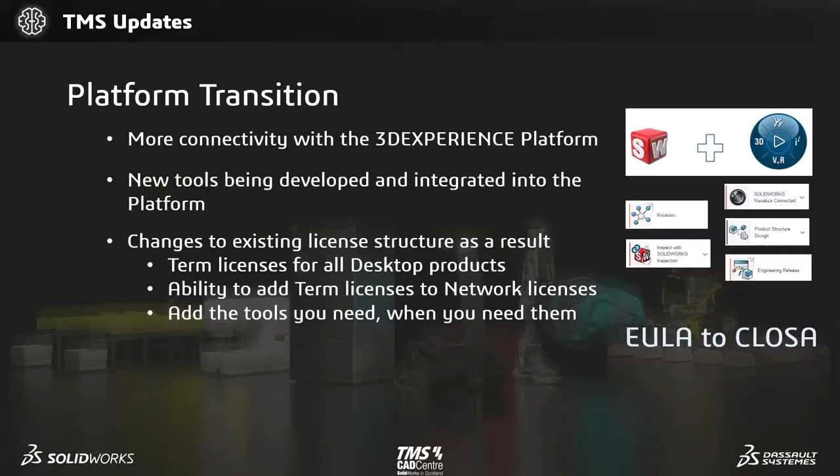So I'm sure you can speak to one of your account managers if you need any more information on that side.

SolidWorks 2023 SP0 actually was released on Monday, so when you're done here today, you can download it, but it's up to you. Obviously, you don't want to start installing it if there are other users out there you don't want to change the file formats and upgrade without telling anyone about it. If you've got any questions about that, just let us know. It's available in the download section, like I said earlier, and that's the exact button I was telling you about. To launch the 3D Experience login, you click that blue button and log in.

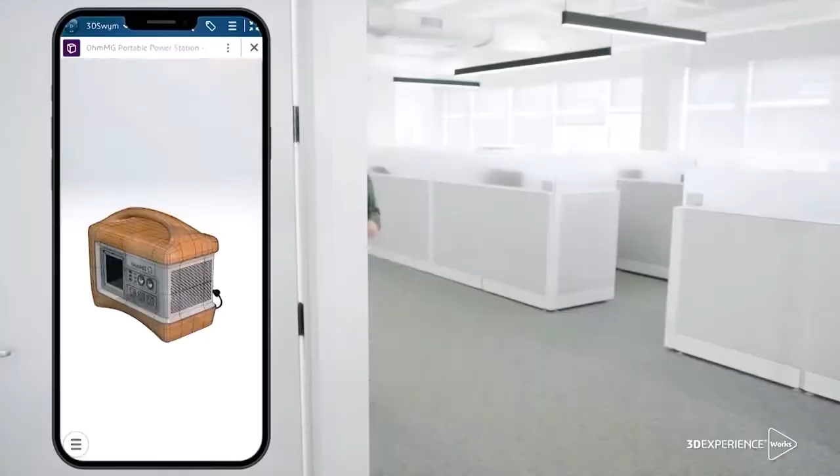For 2023, the SolidWorks R&D team, as usual, has delivered an amazing lineup of enhancements to help you work smarter, faster, and together. Not just together as a team, but also connected to your data and your tools. In 2023, we will improve your productivity and optimize your CAD potential.

But to truly accelerate your innovation, you need to make all product information available for your entire enterprise to access and act on in real time throughout the day, wherever they are. As you look to 2023, how will you continue to improve your productivity and expand creativity? How will you inspire those around you?

For now, sit back and enjoy the demonstrations that follow. Share them with your friends, and let's make 2023 together the most innovative and successful year yet. And see you next at Houston for 3D Experience World.

Alright, so I guess it's over to the three of us who'll take you through most of the stuff regarding what's new for 2023.

Before we go on to 2023, I'm going to let this video play in the background, showing some of the enhancements that have come from 2018 up to 2023. That's useful because not everyone upgrades every single year. Some people might upgrade from 22 to 23, so they just care about what we're going to show in the next few hours, but a lot of people only upgrade every 2-3 years.

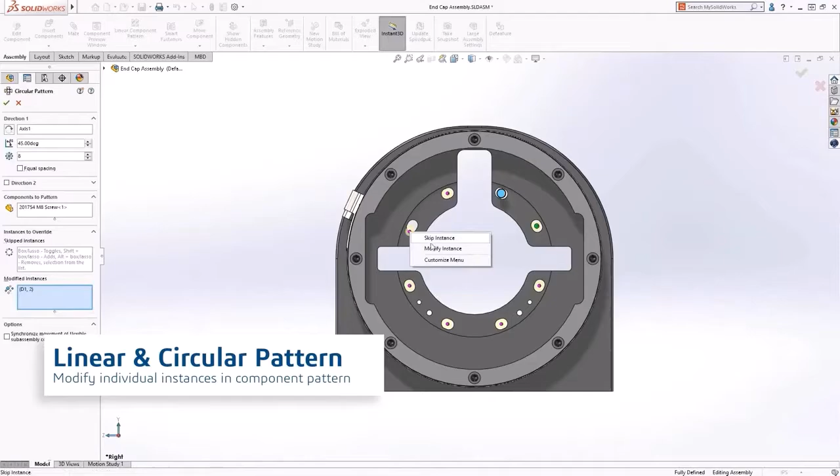This is just trying to show, for each of the different sections of main SolidWorks - parts, a bit of assemblies, drawings, and user interface - some of the enhancements taking place. I'm not going to go through a demonstration for every single feature. We'll jump through the years, going back and forward with some of those enhancements, but we'll talk you through a couple as we see them on screen along with some background stuff.

There will be a few of these that are for 2023, so you'll see them in more detail, whether it's from me, Scott, James or William this afternoon. We won't necessarily go through the enhancements specific to all of the add-ins - so PDM, simulation, composer, visualize, inspection, MBD, all that sort of stuff - we're not going into them in this video. It's mostly the main SolidWorks that we're interested in.

So I'll just be picking out a few of them as we go through and talk about them in a bit more detail.

This was one that was added back in 2020, I believe. If we're wanting to add more texture to a model, rather than just simply applying a decal, we can actually apply and add or remove material inside there. We've got some changes here to the direct mesh, which is more important for non-SolidWorks parts - could be STEP, IGES and all that sort of stuff.

Stud wizard - you can almost think of it as not too dissimilar to the hole wizard, where you can pick your standards and the types of size that you've got inside here.

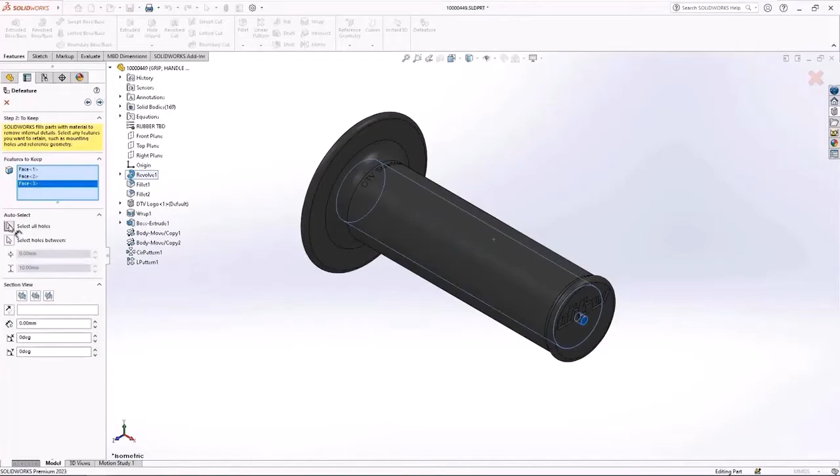The Defeature tool on screen is similar to the terminology 'simplify'. This is where you might want to send a model you've made to another customer, but if you don't want to send them absolutely everything so they can see exactly how you created that part feature by feature, you can simplify that down and send them almost a dumbed-down model. Some people do that by saving a step or IGES file, which can work - when you open that up, you don't have a feature tree. So the Defeature tool is another way you could go about doing something like this.

If you attended the 2019 launch event, you'd probably recognize this telescope model. If you came to that launch event, we actually had that in VR as well, so you could walk around the model using eDrawings, which gives you the scale of the model - it's not just a simplified dumbed-down model, with this telescope and all its different sections.

You can actually go into the workshop, find the bathrooms, go up to the top lens, go onto the balcony and look over it, all that sort of stuff. If you ever get the chance to see that telescope model, and even some of the other models we'll look at today, in VR - which most of us will have access to through eDrawings Professional - it can be quite good to see and interact with that.

We'll talk a bit more about that as we go through the day. And again, that Defeature, you can also use in the assembly environment as well, so it's not just specific to the part environment that we looked at.

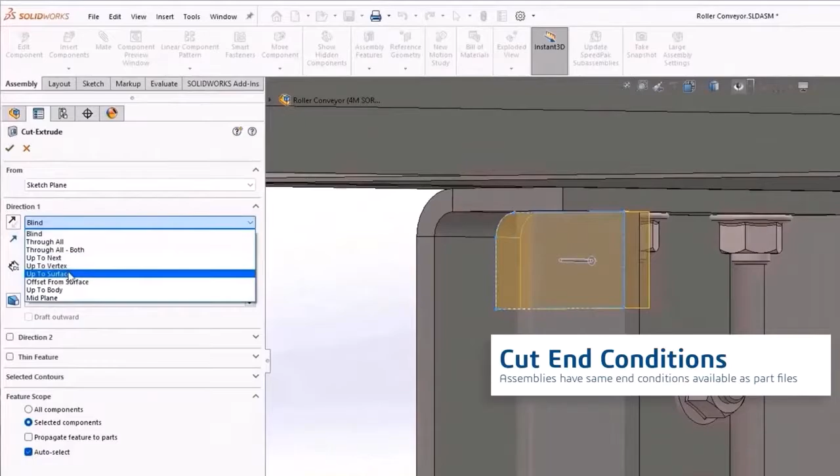And what popped up there a second ago - I don't know how many of you use the S key when modelling in SolidWorks to get that little fly-out window appear. It's a quick way of accessing your model-relevant features. That S key will change depending on whether you're in the part, assembly, or drawing environment, and if you're inside a feature, it will pop up with relevant sections.

This optimised resolve is one that's new for 2023, and I think it'll tie in with the assembly side of things that Scott and James will be talking about. That's going to be a way you can make things open up a bit quicker. And we can then export the assemblies and stuff like that out as a STEP file as well.

Quick recap of some of the enhancements on the user interface side of things, just generally using SolidWorks. Again, some of these are to make your day-to-day use a bit quicker.

I'm not sure how many of you use the mouse gestures - that's when you move your mouse up, down, left, right, and you can pick whatever features are relevant to inside there.

When you're seeing these little arrows pointing out, that's the parent and child relations inside SolidWorks. If you don't have them turned on, you can get that from clicking the View option at the top of SolidWorks, under user interface, and turn them on from there.

This is searching for the commands you can add to the S key. A little bit down at the bottom right there is the S key fly-out. You can add more features there, or you can always search and add them to the command manager at the top of SolidWorks.

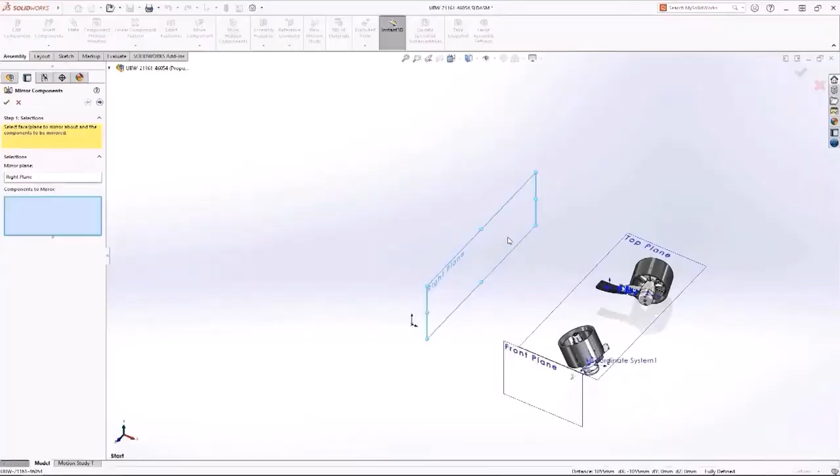This one might not be intuitive straight away if you've never used it before, but if you get into the habit of using even just one or two shortcuts - pick one thing you do every day, learn that shortcut this week, next week pick something different - and go from there.

We've also got additional abilities in regards to comments. This is just using the desktop SolidWorks. If you decide to use the platform side of things, there's comments and stuff you can add, whether it's tasks or whatever you're using.

Now looking at some enhancements over the last 4 or 5 years regarding the drawing side of things - there have been changes to the bill of materials, and you've got options to export that into Excel if you want. We've also got different dimension types you can add in there, so you don't always have to use model items - you might use the smart dimension tool and pick a different way of adding dimensions to your models.

Detailing mode had quite a few changes a year or two ago, starting with 2020. It's a way you can open up your drawings a little bit quicker but still have the capability to make changes. Rather than open up just in quick view, which opens fastest but limits what features you can use, detailing mode can be quite handy.

There was also a big change with geometric tolerances. If you're adding them in, the user interface and how they're selected changed. That goes back to the detailing mode I mentioned, how we can add and change stuff inside there.

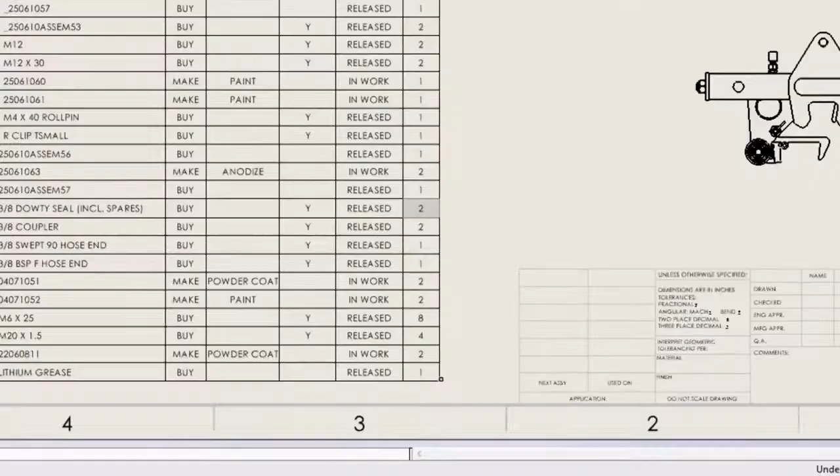This will actually be open drawings here - this is one I'll talk about in more detail myself when we look at the enhancements in 2023 specifically with the drawing side of things. So this is almost like a little preview of what's to come with the 2023 drawing enhancements - you'll see different colours based on things that have been overwritten, and so on.

When we're adding balloons to our model, we can show a quantity - rather than splitting the balloon circle in half to show info above and below, we can have a bit of info to the side.

On that topic of balloons and bill of materials, there are some additional changes to how we can filter and search through the bill of materials - we can hide and show different columns at different times, different bits of info and certain properties.

In our document properties we can control the transparency in the drawing to try and mimic what would be in the part or assembly - that's how we can see the little increments of the dial in there.

If you want to see more enhancements over the years, every year there's a What's New PDF file you can get from inside SolidWorks. If you go to Help, you can see What's New and get either the HTML or PDF version that tells you what's new that particular year.

If there's a particular topic or area you're interested in - maybe you're upgrading from 2015, we spoke to customers still on 2015, even 2012, a few weeks ago - if you want to know some of the big things that are new through the years, by all means get in touch and let us know.

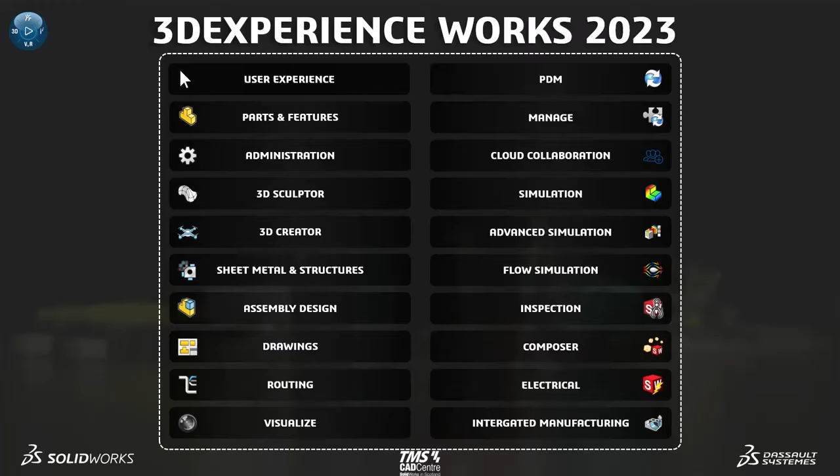After that, we'll see what's new with data management and simulation, and we'll cover a few other SolidWorks products as well, like Visualize, Inspection and Electrical. We'll hop in and out of the 3DEXPERIENCE platform throughout the day too, so you can see some of the good stuff we've got going on in there.

To start us off, I'll take us through what's new with the user experience side of things, where we've got updates to things like comments, like we just saw a preview of. Ways we can reset any customizations we make to the interface, and we've got some stability and performance improvements as well with the render system there. So we'll just dive straight into that.

As a SolidWorks user, you expect the best out of your software when it comes to customization, performance, and working alongside others. SolidWorks 2023 significantly improves the user experience.

Communication with your team during a project is vital, and a great way to do this is through comments. For 2023, these have been updated significantly, so you can now emphasize text using bold, italic or underline modifiers. Adding a screenshot to the comment is nice and easy as well.

You can add images from your local machine to give your comments more context. The background colour can also be changed so you can understand the priority of the comment straight away, and these labels can be customised to add even more clarity. If a comment is very important, you can set it to appear when you open up the document. SolidWorks has always had a very customisable interface, but sometimes you can end up customising it too much.

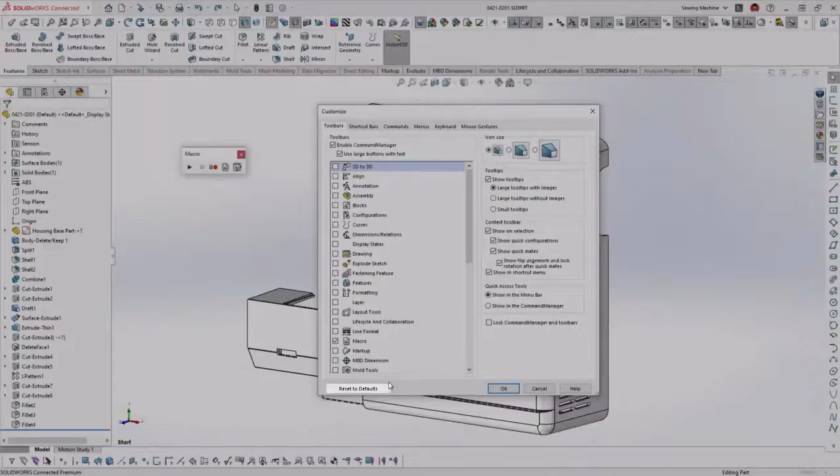You actually just make it a bit more confusing and difficult to find the command you're looking for, so you might want a fresh start. In 2023, you can now more easily restore the default settings. Each tab of the Customise window now has a Reset to Defaults button that allows you to reset that specific tab's settings, so you can reset the command manager, or remove all your customizations.

We also have to talk about performance. The render system released in 2019, to improve frame rates during pan, zoom and rotate, has been dramatically optimized. Many issues have been resolved, and customer feedback on this has been heard. You'll now have greater reliability with the enhanced graphics performance box checked, so you can utilize the faster frame rates when viewing large assemblies especially, or parts with complex geometry.

A better user experience means improved productivity. Customizing the user interface, communicating effectively and improving frame rates allows you and your team to speed through your designs. Communication can be taken even further if you're storing your data on the 3DEXPERIENCE platform. All users can be given access to view content and even add markups on any device with a web browser. These markups are stored with the data and shared directly so that the right people have access to the right data at the right time.

So that's everything on the user experience side of things, and I'm sure you'll agree some really nice enhancements in there, just with the new comments and the ability to reset specific parts of your customised interface. But that's all on that side of things, so I'll pass you on to James now, and he's going to run through the enhancements to parts and features.

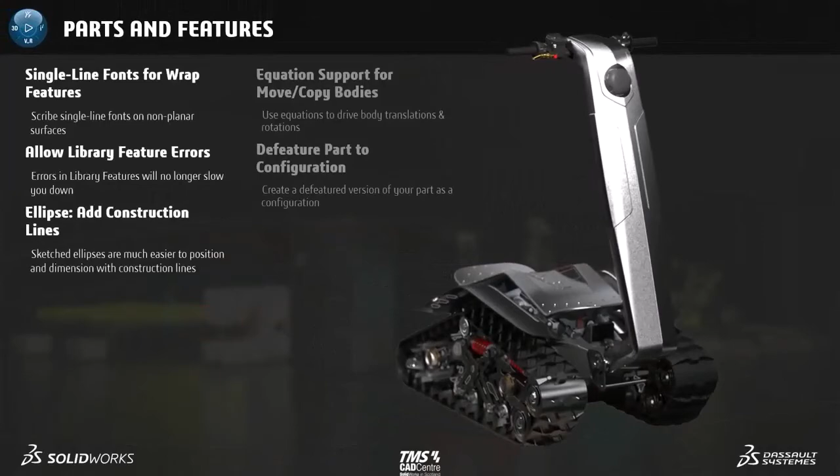I'm going to cover the new enhancements to parts and features, and with this we're going to be using this assembly of an all-terrain vehicle design. Some of the enhancements we've got here: wrapping, new single line fonts, allowing errors in library features so you don't need to go back and edit them, more automatic construction lines, more areas where you can use equations, and some enhancements to the defeature tool.

SolidWorks is the most feature-rich CAD solution available, but that doesn't mean significant improvements can't be made. In SolidWorks 2023, Dassault Systemes have focused on expanding the capabilities of existing features to make you more productive. Inscribing information such as serial numbers or model names into cylindrical surfaces is best done with single-line fonts, and SolidWorks 2023 allows you to scribe these fonts using the wrap feature.

Adding the logo here at the end of the handle is easy with library features - just drag and drop. However, in some situations, a reference may not be valid or otherwise broken. In 2023, you now have the option to just keep the feature and solve the issue manually, rather than having to cancel it and then go into the library and edit and reapply it. That really just saves you time.

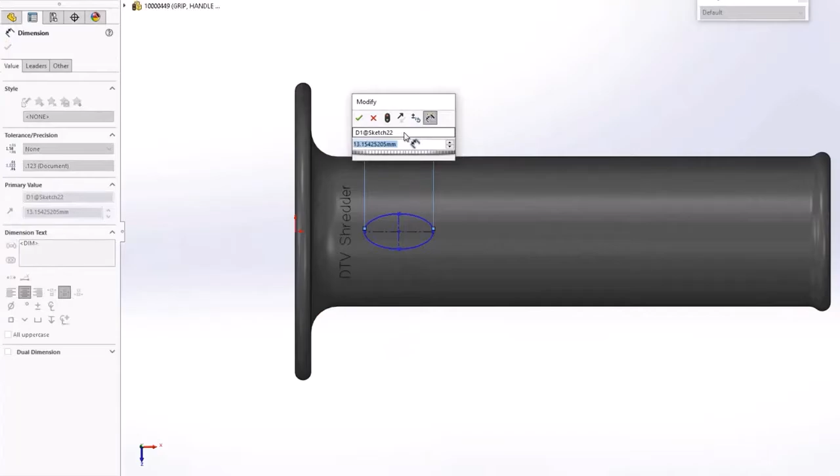This design's a good start, but the smooth surface may not provide enough grip for the rider. So what we're going to do is create a pattern of ellipse-shaped bosses to give the rider confidence when travelling over extreme terrain. With 2023, you can now create ellipses with construction geometry, making orientation effortless - all you need to do is select the construction line and apply a relation to it. Same case with defining it: select that same line and dimension it there, rather than selecting multiple points.

Creating an offset body is easy, but how far along the handle should it be placed? Since we're creating a pattern in these bodies, it would be best to define the parameter based on a global variable that also defines the spacing of the instances. In SolidWorks 2023, the Move Copy Bodies command can now define translation and rotation of bodies with equations, even on a per-configuration basis.

So a design like this tends to be iterative, so having convenient access to these parameters will save time, and this is where using equations comes in, and allows you to make broad changes without having to edit each individual feature.

So finally, reducing part complexity and protecting intellectual property is a great use of the defeature tool. In some cases, you may not want to create a whole new part that then has to be managed, stored, or lifecycle managed with the PDM system.

Coming in SolidWorks 2023 SP1, you'll be able to create a configuration of your defeatured parts, which can then be used for creating simplified versions.

This configuration is stored as a derived configuration, so it will adopt any changes made to its parent configuration. This also means replacing the part in assemblies is just as simple as selecting the drop-down rather than selecting a new part file and reattaching all the mates. You simply just select the configuration.

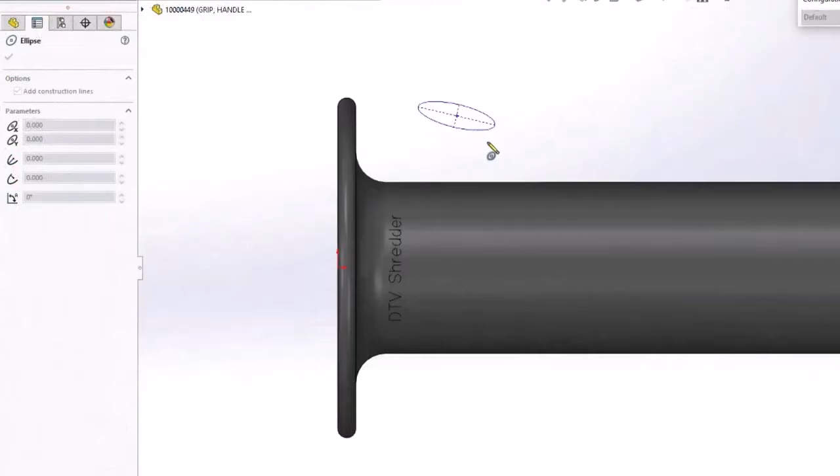So these features coming in SolidWorks 2023, they're even better with this latest release, whether you're sketching, inscribing text, or just working with bodies. Saving your data to the 3DEXPERIENCE platform allows you to do much more with it.

You'll have access to tools like advanced analysis with Simulia, complex material models, highly accurate solvers, and powerful cloud technology that drastically reduces solve time. This means you'll make better designs faster with the 3DEXPERIENCE platform.

So with that, we've seen some of these nice enhancements, whether it's expanding use of equations. If you are creating any sort of updates or adjusting sizes, the more you can use equations, the less margin of error you're going to have for any sort of input problems.

Expanding on that, there's now a new option to use the Euler method for angular rotation. That's going to allow you to use an order-independent method, which means it's a lot better for use with configurations. Also, the translation of bodies is now configurable and can be driven with global variables and equations.

So I'm now going to pass you on to Craig, who's going to be covering the administration side of things.

So for the administration side of things, we're really just going to cover a tiny section of it, and a little bit more with the license side of the admin. When we come back after lunch, I'll talk a bit more about the admin side of things in terms of system requirements, service packs, and operating systems, all of that side of things. I'll come back to that after lunch.

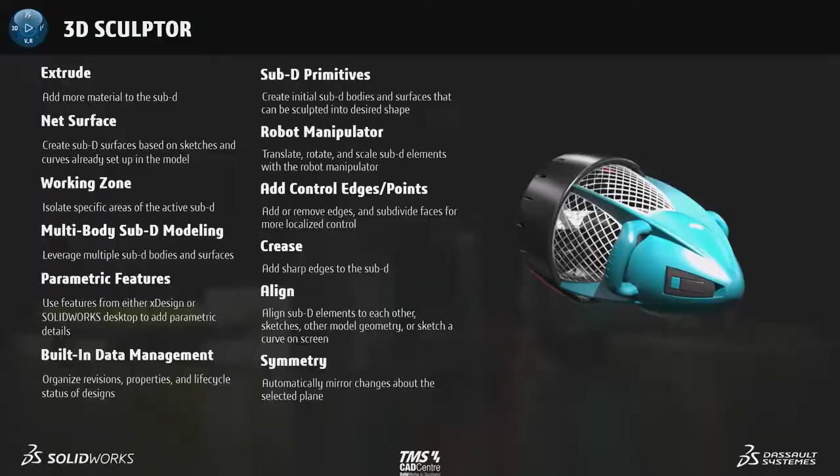So obviously products today have more style and complexity than ever before, but turning your design ideas into functional CAD models can be difficult with some traditional modelling tools. 3D Sculptor takes a simpler, more free-form approach that unlocks endless design possibilities, offering subdivision modelling inside a browser.

So we're going to see how Dan, our designer, is going to use X-Shape, which is the 3D Sculptor, to create a sleek and stylish exterior for a scooter design. Dan's new components start with a few reference images, similar to what we could do in SolidWorks, and then subdivision modelling is going to begin with a primitive shape.

It can then be scaled uniformly or potentially with a bounding box at any point in the design. We can push, pull, scale, rotate those subdivision models with the on-screen manipulator to sculpt any shape pretty much imaginable. We can add and remove edges or subdivide faces if we need a little bit more localized control.

Curvature continuity is maintained throughout, but if sharp edges are needed, we could add a crease to make adjustments on the fly. Once we're happy with a design that we've got, we can use our tasks on the side of the platform.

And we can drag that work to say it's in work, we're making changes, then we can continue to make further changes inside that.

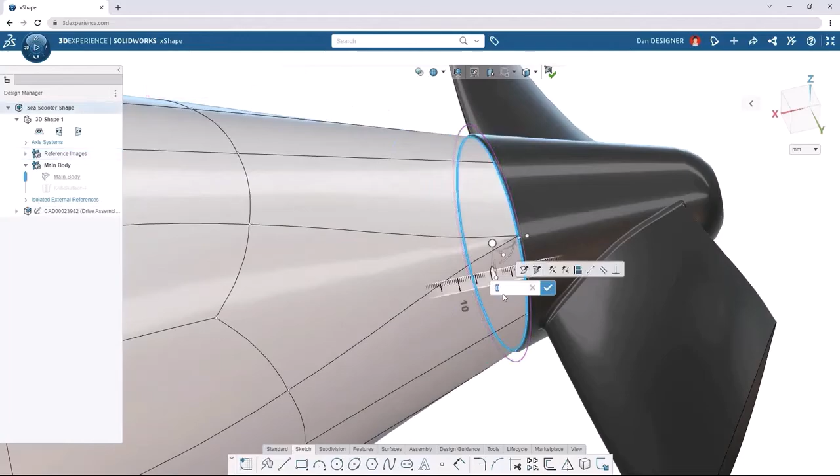So we'll continue to use our mirror tools. When we start to make one change to the mirror plane, that change will be reflected on the other side, assuming we want that. We'll use that symmetry plane inside there.

Obviously we can add more material with things like the extrude command, or we could insert entirely new subdivision models. So we don't always have to just use one subdivision model and go from there. We can use things like the lasso tool and align subdivision elements to a curve that can be drawn right on screen as needed. The net surface command is perfect for creating sub-D surfaces based on sketches and curves already set up in the model.

Parameters of the new surface can be adjusted before sculpting it into a 3D shape. So as we're going through here to create a little bit of a side section of our model, we can mirror that over to the other side if we want. We can also then turn on a working zone to isolate specific areas of our active sub-D model or surface.

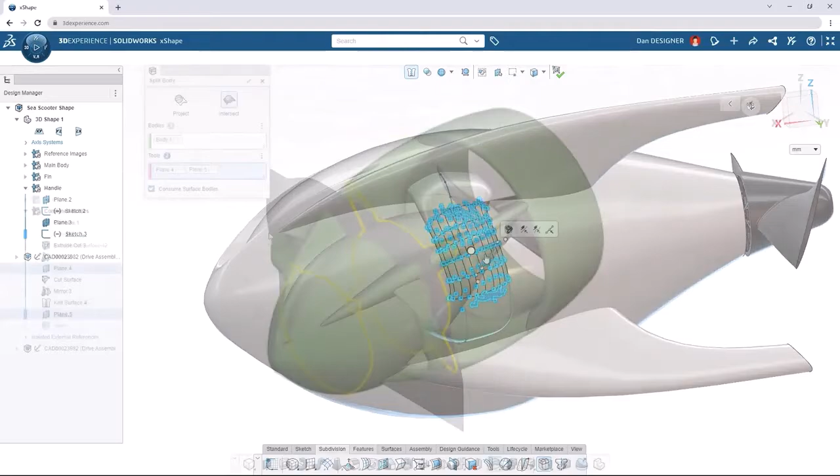Multiple sub-D model bodies can be combined to a master model, or we could use a split command to divide that up into individual components. Once we're finished, we can drag our task, saying that the work I've been tasked to carry out has been complete.

Adding manufacturing detail could then be done in XDesign, or we can jump back to the normal desktop SolidWorks. So it's not necessarily that X shapes are an alternative to desktop SolidWorks. They can work perfectly hand in hand, and you can jump back and forward between them.

As the design of the Sea Scooter continues to evolve, we can make new revisions with the built-in CAD data management on the platform, or we can create a branch of the product instead. So rather than necessarily creating revision A, B, C, D, we can create a little branch off to the side instead.

The 3D Sculptor freeform environment allows you to create those complex shapes and surfaces more easily than ever before, and you can collaborate with your teammates to take your design concepts to production.

From any browser, obviously connected to the internet. So that's some of the enhancements to 3D Sculptor.

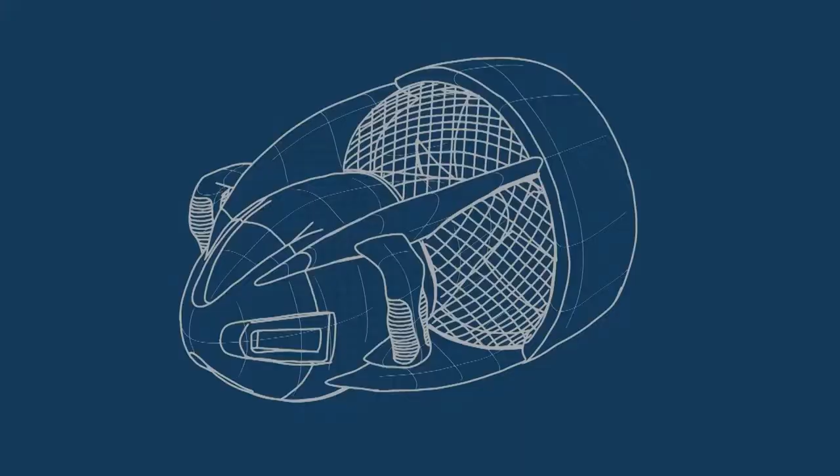Anyone online, if they want to grab a wee screenshot of that, go ahead, but we'll dive straight in and show you. Developing products nowadays requires more flexibility and teamwork than ever, and traditional design tools aren't always equipped to handle modern teams spread across the globe. 3D Creator gives us parametric modelling on the cloud, so everyone can stay connected while they take products from idea to delivery.

So let's see how Don here, who's somehow managed to land a designer job without having any eyes, can use the XDesign app to complete the latest Sea Scooter assembly. His first task is to design the battery enclosure.

Part design typically begins with a sketch, and commands are easily accessible from context menus and shortcut rings. You can see how easily we can pop in a sketch fillet just by dragging our mouse over the corners of the sketch there. We can easily switch between extrudes, revolves and sweeps, all from one command with our super features.

User parameters can drive both sketch and feature geometry, so design changes can update predictably. Shortcut rings adapt to the working environment to keep the most relevant commands close at hand. Command parking adds sketches or reference geometry on the fly without having to leave the feature.

Design Assistance anticipates our next steps, which can help speed things up by making sketching less repetitive and making our sketch selections for these features faster than ever. Or you can skip the sketch entirely and extrude from any existing face, and we can use the complex blends feature to create a variable radius fillet like we'll see just here.

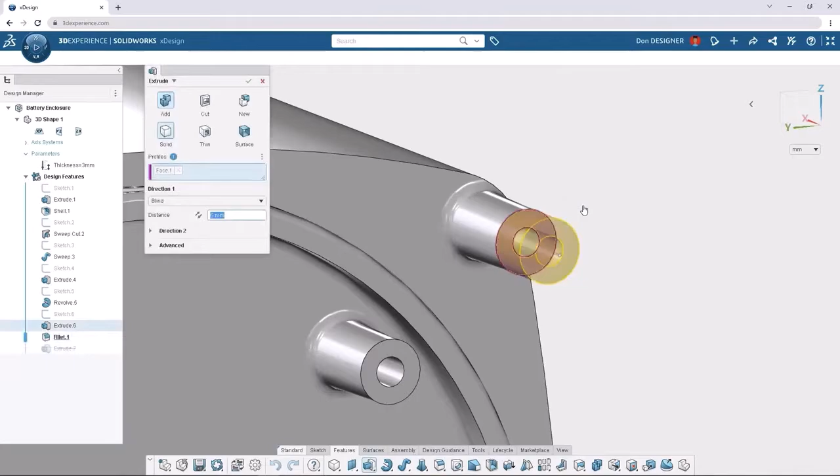We can drag and drop to insert a part from an assembly from another XDesign window. It's all connected in here. We can just go and drag that straight over and pop it in.

Assembling components is easy with intuitive context tools that recommend mates based on selected geometry, just like we'd see in our context toolbar in SolidWorks, for example. We can create a new component from an existing feature straight from the right-click menu or in the context of the assembly as well.

We can also import PCBs and other ECAD files in traditional IDF formats, as we'll see just here.

The snap to fit mating tools can speed up repetitive assembly tasks, and AI helps us predict the placement of similar components so we don't have to go through the same steps over and over.

Copy with mates replicates components where patterns don't apply, which again can really help to speed up the assembly process. And advanced mates allow designers to visualize complex motion scenarios, as we'll see in a wee second here.

I'm probably talking a little bit too fast here. I'm kind of jumping ahead a bit in the video there, sorry.

Yeah, so there's our wee motion scenario there.

Built-in collaboration tools can connect you with your team, so working together on designs is easier than ever. There's no need to jump back and forth between different apps in order to convey your ideas. We can create and review markups to clearly communicate these ideas and share updated models, all within the design workspace.

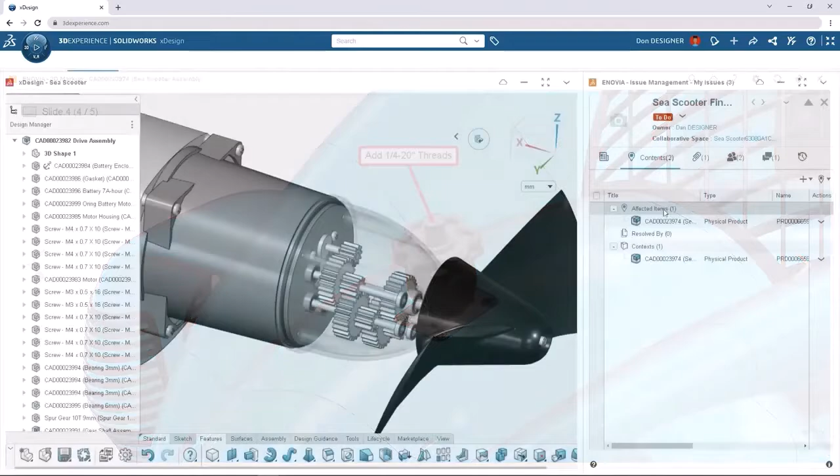Jumping back into the model, we can easily drive our component patterns and assemblies by simply selecting existing pattern features that we've already used to build up our geometry. Reusing sketches from other components is nice and simple, and again can save us some time and ensure standardization across the board, like you can see with this sketch for the wee logo on the side there.

We can create cosmetic or production-ready physical threads for most standard thread types, and integrated 3D printing places components in a virtual print bed configurable to the settings of most 3D printers. The auto-arrange tool intelligently lays out parts to avoid merging, and support analysis determines what areas in the design will need support during printing. We can begin physical prototyping straight away by connecting to our supported cloud printers or exporting in most common 3D formats.

So as we can see there, the 3D Creator gives us all the tools we need to complete design tasks, connect with your team, and prepare for manufacturing. And this can all be done from a web browser on any device. So I'm sure you'll agree, some really nice stuff in there.

Can really help us to speed up the entire assembly process. Particularly things like the design assistant that can save us time with those repetitive tasks, and the smart mates to predict what we're going to do next as soon as we drop the components into the assembly. So that's our overview on 3D Creator, and again we're going to pass you back to Craig. He's going to look at the enhancements to sheet metal and structures.

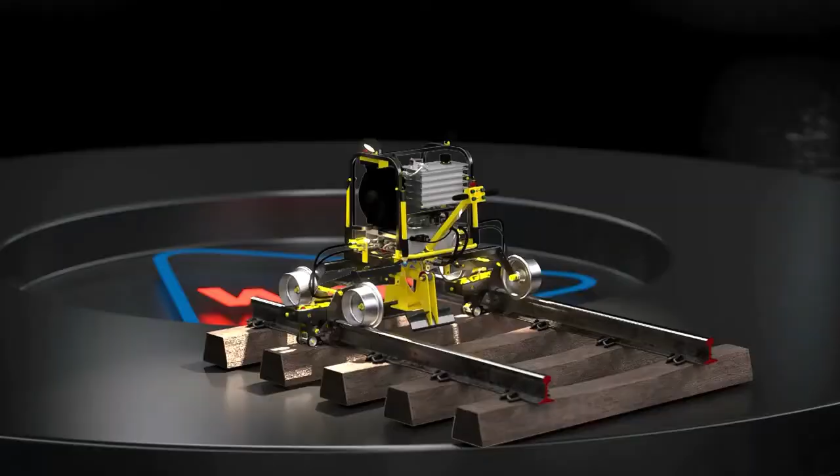This is a model we'll be using for not only this section, but also when we come back to the drawings in a bit, we'll be using this similar model and track. So obviously sheet metal, structures, and weldments work hand in hand, and we'll see some enhancements to sensors that we can add in regards to sheet metal and structures, some changes to thickness, and quite a lot of stuff where we can group things to try and make repetitive tasks quicker and simpler inside there.

So we'll go through some examples. In SolidWorks, structural systems and sheet metal have new enhancements for 2023 that enable smoother design to manufacture and speed up the workflow of tedious tasks.

This track setting machine has a hydraulic guard that needs to be extended to further protect the couplings underneath from heavy equipment and potentially falling debris during operation. Opening this sheet metal part, we can easily extend the front part by a further 2 inches to cover that coupling. But notice when we make this change, a little new sensor has popped up at the top left corner, and that can dynamically warn us if the flat pattern exceeds set widths, heights, and distances inside there regarding the bounding box.

The new feature saves redesign time by catching those costly mistakes to your sheet metal parts, so they'll sail through manufacturing. By reducing the outer dimensions of this part, we'll see that the warning has now disappeared, so we know that's a bit easier to manufacture.

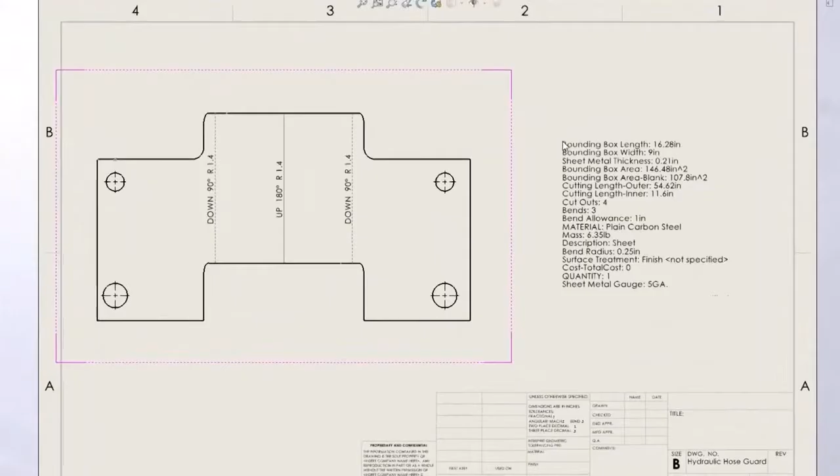We used a gauge table for the sheet metal part, and now in the drawing, the gauge value can be added directly to the cut list properties, preventing the need to create an additional global variable and setting up equations for that.

As we're preparing to ship the machine, we need to build a sturdy, reusable shipping crate to prevent damage while transporting from job site to job site.

SolidWorks Structural Systems is used to build this steel crate from a combination of 3D sketches that were created, and we can use them for our primary members, reference planes, as well as secondary members.

But sometimes we'll see corners that might not be easy to manufacture, so we might want to tweak them up. New in SolidWorks 2023 Structural Systems, we can now automatically group similar corners to apply the same corner treatment to multiple corners at the same time. You can see the little pink arrows that we're seeing.

We're going to apply the same corner treatment to all of those, and we can use the right click zoom to selection to see how those behave. So when we change the order, that change isn't only applied there, it's going to be changed elsewhere throughout our system.

We may want to build a more durable crate with larger square tube stocks, and potentially also add in gussets. Similar to before, where we can group similar sections for the corner treatment, we can do similar things here - that's added into all the corners that are of similar sizes.

So SolidWorks Sheet Metal and Structural Systems in 2023 tries to accelerate your design to manufacture workflow with added features, making things easier to manufacture when they get sent to the shop floor. We can add in sensors, and there are other sensors we can add for our sheet metal stuff as well.

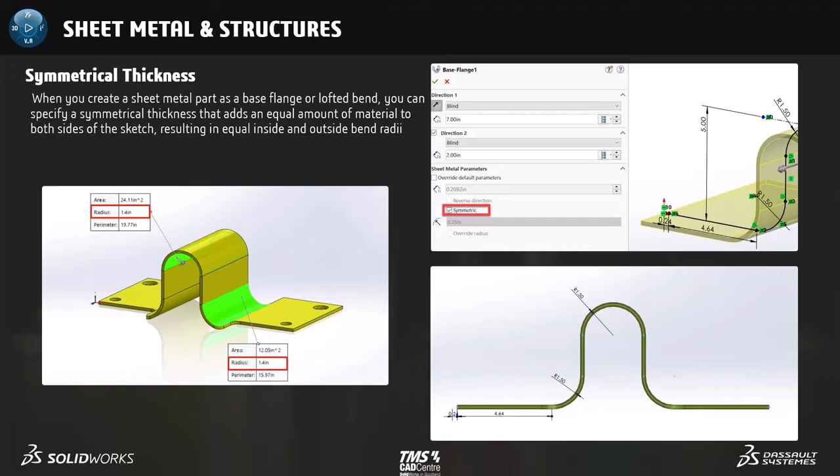For the sensors we can monitor the length, the width, the area and the box being blank, and that information can also be shown in our properties to pull through to the drawing. Then we can have that symmetrical thickness, watching out for the bend radius to make sure they're the same when we add them in.

All that properties from our sheet metal stuff, we might want to show that in the drawing. Again, you don't need to create a note for this on the right hand side - we have one note where all of a sudden you've typed in 15 lines. You can just right click and insert the cut list properties, and that will create this little list. But now we can also have the gauge added in there as well.

In Structural Systems, we can try to group things together, not only with this corner treatment, but also if we're adding in things like our gussets. And when you've got your different members with different sizes, it'll be a bit easier to control them through configurations.

You can save each of those configurations out to an individual part if you wanted to. And if you're adjusting any corner treatment, you can now use a zoom to selection, rather than manually zooming into the corner you're adjusting, which makes life a bit easier. We can also pattern any connection elements, potentially for adding little gussets and stuff like that. So those are some enhancements to sheet metal structural systems and weldments.

I'm going to move on to assembly modelling, which will be a combination of James and Scott. Cheers, Craig. Yeah, some really nice enhancements there for sheet metal, but we'll jump onto the assembly side of things now, and we'll see some of the enhancements that we'll go through here.

Creating assembly patterns is a common time-saving practice, and patterns such as this linear pattern often require some instances to be skipped with differing variations between our configurations. The traditional workflow here would need multiple pattern features or instances to be suppressed or unsuppressed depending on what we're looking for in each configuration.

In SolidWorks 2023 though, this is no longer the case, so any pattern type that supports skipped instances now also supports configurations. We now have a much more direct way to modify our patterns where we can just jump into each of the configurations. We've got the same menu we would usually see there, and we can just pick out which instances we do or don't want to be shown for each one, really speeding up that process.

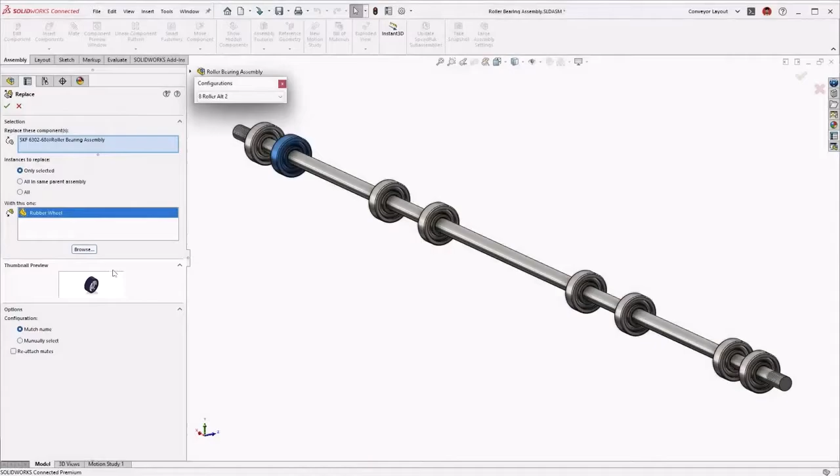If we bring cost into consideration, having a rubberized wheel might be a better option than the current ball bearing that we've got selected here. Using replace component is a simple way to swap out our parts, and you'll now see additional options have been added. 2023 gives us the ability to replace a single component, multiple components in the current assembly, and can also control the configuration behaviour of the assembly and sub-assemblies. We also have a nice little preview window, giving us some visual feedback to make sure we're getting the correct replacement.

But during that replace command, a rebuild error occurs due to a failed concentric mate. The mismatched face IDs can often lead to lost productivity during assembly design, but with SolidWorks 2023 you'll be glad to see we now have a new auto repair feature built into the context toolbar, or located in the right mouse button on the mate group. Auto repair will automatically look for similar faces, edges or vertices or reference geometry and attempt to reattach any missing items. It's a huge time saver for keeping your assemblies error free when making these changes.

With multiple configurations in this assembly, you'll want to ensure the bill of materials appropriately reflects each instance. In previous versions of SolidWorks, this option could be set in the configuration or bill of materials properties, which is a bit of a manual and sometimes overlooked process. In SolidWorks 2023 though, we have a new document property type, allowing configurations to be used as the default part number. Enabling this option will make sure unique configurations are accurately represented in our BOMs.

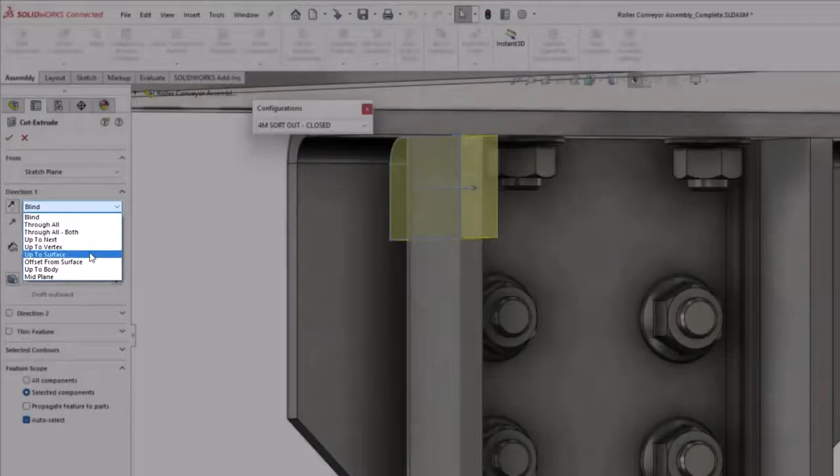To allow for proper assembly of the manufactured model, an assembly cut will be needed so we can access some key fasteners. In SolidWorks 2023, assembly cuts include the same end conditions as seen at the part level, giving us a bit more flexibility. In this case, adding an up to surface end condition will automate the exact cut depth, regardless of any changes to the conveyor's geometry. Using a box select will gather all intersecting parts to be included in the cut, which includes some toolbox components in this case.

Now this could lead to some issues downstream with the propagate to parts option checked, but in SolidWorks 2023, toolbox components are automatically removed from this list and a notification is shown to let you know, giving you an extra level of security and a bit of peace of mind that you're not accidentally going to modify something that maybe you shouldn't be touching.

Now, looking at the conveyor assembly, multiple configurations have been created for this. To speed up the layout process, magnetic mates have also had a little bit of an update. These have been defined in this assembly, but depending on which configuration we're in, different magnetic connection points may or may not be needed. SOLIDWORKS 2023 adds new functionality to magnetic mates by allowing you to suppress and unsuppress individual connection points. This gives us some extended functionality to an already really powerful way to approach your assembly process.

Even with configured magnetic connections, getting the right placement can sometimes be a tedious task. For 2023, magnetic connection points respect the visibility of the part or the assembly they're attached to, so using things like hide, isolate and display states will help you focus on the areas where new connections are taking place, like we can see there.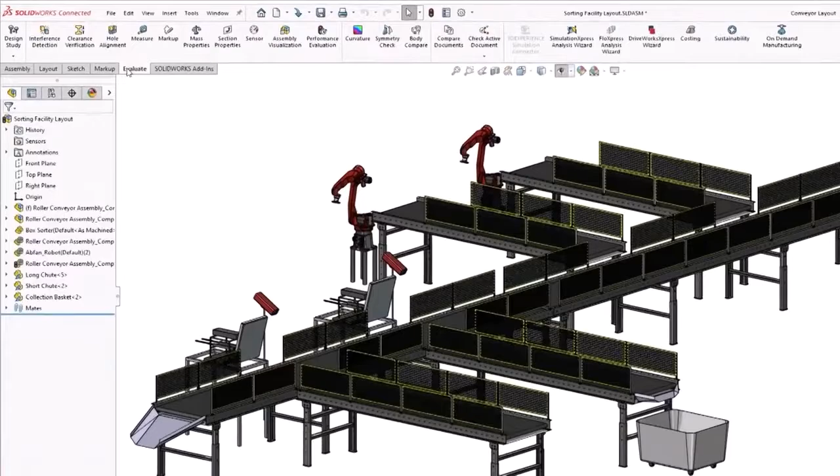Now, a tool that maybe doesn't always get used as much as it should is assembly visualization, which offers a dynamic way to display and sort information about your assembly. In 2023, additional support for lightweight mode is introduced, no longer requiring you to resolve components to see properties such as mass and total weight. The properties drop-down list has also been updated to an alphabetical order, a much more intuitive way to locate commonly used properties such as graphics triangles.

And if you've used this tool in the past, then you'll be glad to see that the rollback bar has also been thickened to make it much easier to grab and drag up and down, so you can position that where you want to see different components.

So as you can see, this assembly now is starting to grow in complexity, and we all know that can have an impact on overall performance. SOLIDWORKS 2023 simplifies working with large assemblies with a new system option in the performance section. Enabling this improves performance by selectively using lightweight technology when you load components in resolve mode, taking out the manual process of switching between the two. With this new option available, you can spend more time on your design and less time messing around with different assembly modes.

Large assemblies can also introduce issues when working with external vendors and neutral file types, such as the commonly used STEP format. SOLIDWORKS 2023 now supports exporting assemblies as multiple STEP files through another system option. With this one enabled, STEP files for the top level, sub-assembly and individual parts can be created, making things a lot more streamlined when working with those neutral file types.

So whether you're building simple or complex assemblies, SOLIDWORKS 2023 offers an array of new enhancements to ensure your job can be done as efficiently as possible. Being able to do things like skip instances in your assembly patterns, quickly repair missing mate references after replacing components, and having confidence that our assembly features won't affect our toolbox components will make things a lot quicker and easier than they were in the past.

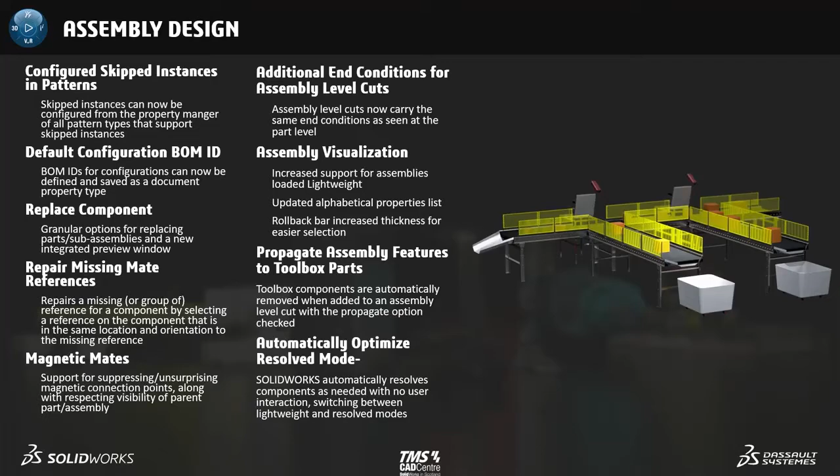We also have a couple of changes, like being able to modify the colour of our explode lines in our system options or within the sketch. And we'll see a prompt when we close a design table where we've manually entered some values, so we can choose between those values we've entered or the ones calculated from the model.

We're not quite finished there with assembly enhancements, but I'm going to pass you on to James now, who's going to take us through some of this new optimised resolve mode.

Cheers, Scott. So one of the most exciting new enhancements in 2023 is the option to enable this optimised resolve mode. This feature allows SOLIDWORKS to choose between lightweight and resolve technologies automatically, selecting the appropriate settings to allow optimal performance with no end user interaction.

So to take a look at the possible increased performance, a benchmark on this 11,000 plus part component assembly was used. So this is a weather satellite.

Infinite workflows could have been identified to test these performance enhancements, but in the end one had to be chosen. In this case, 4 sub-assemblies deep, there was a rebuild error due to a misordered equation set. So loading the assembly, identifying the issue and resolving the problem would require multiple lightweight to resolve operations, as we'll see in 2022.

This same workflow was tested in 2023 with both optimised resolve mode and lightweight operations. So in 2022, on fully resolved, this is on a machine running an AMD Ryzen 7 and an RTX A6000 GPU. This to open gave a rough time of around 2 minutes and 14 seconds.

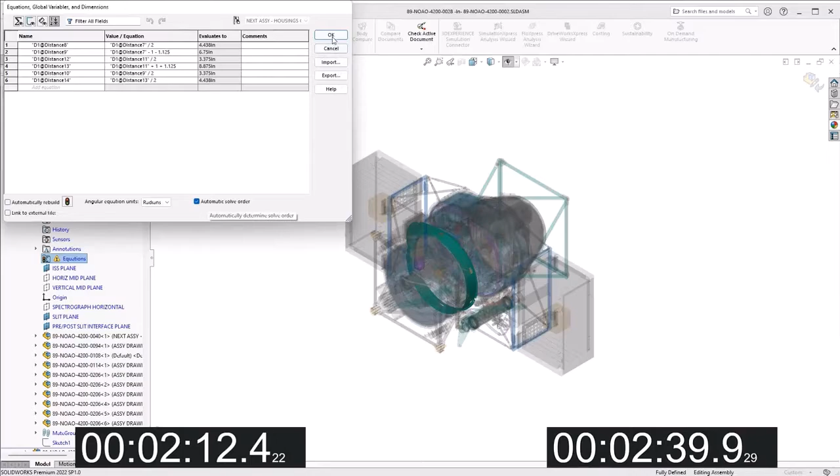Because the assembly was fully resolved and open, the rebuild error was easily traced to 4 levels deep. To open, locate and edit the sub-assembly, the time is shy of 2 minutes 40 seconds. After the equation order was repaired, exiting out and editing the assembly, the final time is 2 minutes 47 seconds. So that was on a fully resolved model in 2022.

So using lightweight mode presents many performance benefits, but can also introduce some issues not present when using a fully resolved model, such as having to manually track down the rebuild errors.

So here we can see we open it, and while it is faster to open, we're going to have to manually track down these errors. After opening with this error, there's the warning, but we need to drill down a bit further just to see where this problem is.

Then opening this sub-assembly, it loads resolved, and this was introduced in 2022. So you're still required to resolve the sub-assemblies at this level to find the rebuild error. Fast to open, but can bottleneck workflows downstream.

Looking at opening the assembly in 2023 with the standard resolve mode shows that you do see a performance increase against 2022. Just going to let that open there. So we do have this performance increase, and that will allow you to locate and repair the issue fairly quickly.

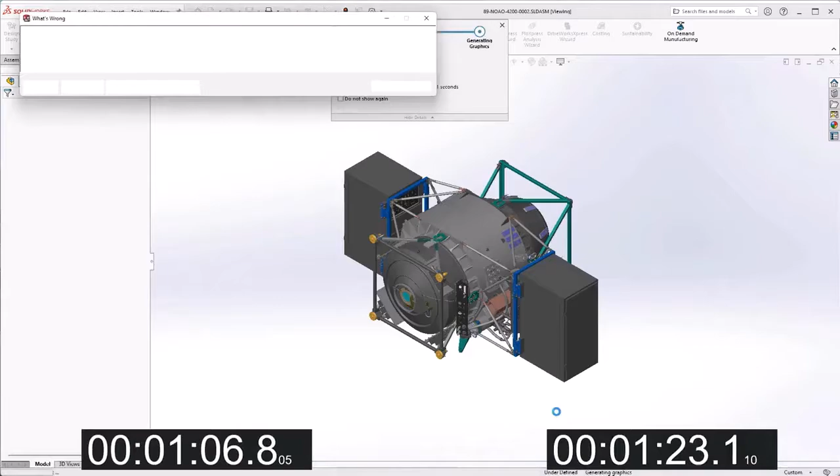We can go in, fix that equation, and be done with that a lot quicker. So now to take a look at the final times, comparing all the different methods.

In 2022 resolved, we have to open, and a total workflow time here just under 3 minutes. Lightweight, while faster to open, did take longer to fix the equation error. 2023 with the resolved mode, same open time, very similar times there to complete.

But now with this new optimized resolved, we look, the performance is incredible. You've got the advantage of opening in lightweight, but in terms of completing the workflow, fixing that error is a lot quicker.

So it's a definite time saving, and obviously if you multiply this out with your assemblies, if you're getting bigger assemblies, if you're doing this multiple times a day, you're going to save so much more time using this optimized resolved. The great thing about it is SolidWorks picks the best method every time for you, so you're not having to wonder whether to open lightweight or open resolved. You're always going to be quicker just using this optimized resolved method. So definite time savings there.

So now with that, I'm just going to pass you over to Craig, who's going to cover the drawings.

Alright, thanks there, James. So yep, definitely some performance improvements there. So I'm going to take us through some examples in the drawing environment. It's quite interesting, I'm using the same model I did with the last section I was looking through. We've seen it a bit in some of the preview right at the start, but we'll have some options in regards to being able to open up the correct drawing at the right time.

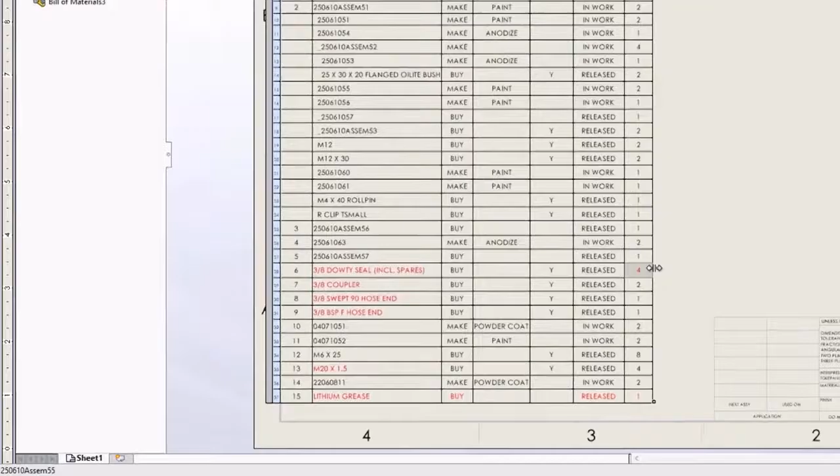It's common in a bill of materials to potentially make a manual override. You can double click the cell and usually a popup will say you're going to override, and you can then type in the value you want. When you override, it will highlight the cells and values you've overwritten, whereas previously there'd be pretty much no way of knowing. In your system options, you can change what that particular colour is.

But now you can also restore that original value. Previously if you overwrote it, you were out of luck - you'd have to recreate that bill of materials from there.

When it comes to auto balloons, you can now show quantities outside of the balloon. This operation was previously only supported with manual balloons that you added in, so this enhancement improves the automation and provides better formatting tools when detailing assemblies.

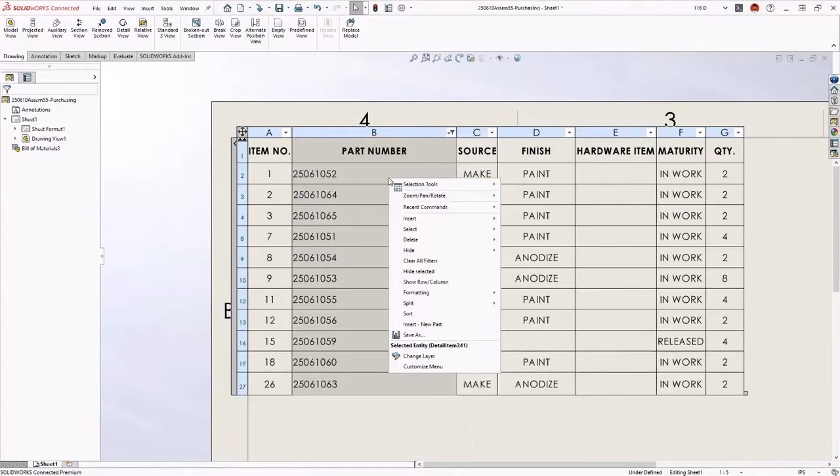2023 for bill of materials can also now be filtered with familiar spreadsheet style controls, similar to what you might be used to in Excel. Icons in the header indicate where filters have been applied, and you can tick and untick them. You can also customize them to add 'and' or 'or' statements, so you can have two filters active at the same time.

And again, for bill of materials that still get too large, we can always split our table in half if the filters don't quite make our bill of materials short enough for us. We can also hide and show those components if needed.

Completing accurate documentation is essential to getting your designs built right the first time. Enhancements in drawings 2023 will help you accomplish your detailed drawing tasks faster and communicate your design intent even more efficiently. And again, if you link that to the 3DEXPERIENCE platform for secure data management,

you can make sure that your most critical and important drawings are fully up to date, and your team is completely informed whenever the drawings are complete. You can also get those notifications sent off to manufacturing to actually get things built from there. So with that, that's some of the enhancements to the drawing environment.

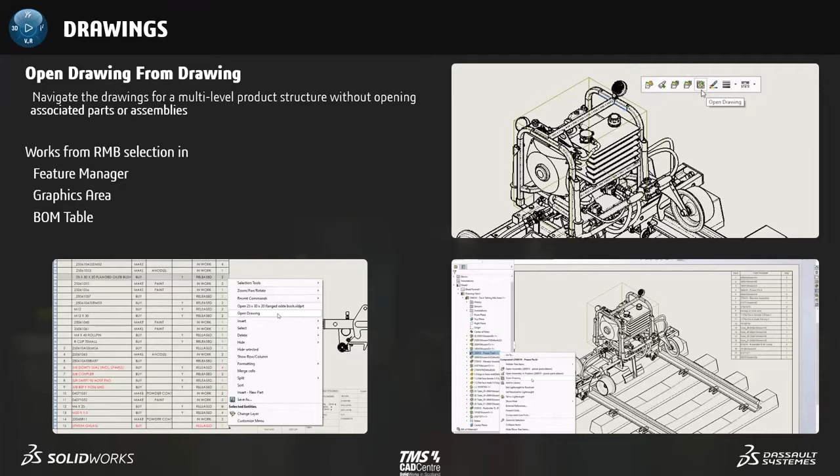Now, at this point, we've got the options to open the drawing. You can get that from the feature tree, your graphics area - top right image - or from the bill of materials. The same is true for other types of tables as well, maybe you've got cut lists and all that sort of stuff.

You can change the colour that the override values are shown in. And if we're using the auto balloon option, you can have the quantities put in there. And again, we've got the filter controls - if you've ever used bill of materials in Excel or something, the filter options should be fairly intuitive.

We can add them to more than one. And again, we've got the display options from inside there, so we can show the transparency with a little tick box underneath where you should change the display style.

If you do have things like section views and detailing views as well, just watch out for sometimes when you're seeing these display styles, the high quality versus draft quality of that. If it's a child view you're looking at, just be careful that you've not got the tick box ticked to say 'use parent options'. Sometimes you'll see you don't have as many options in this view, and it's because it's copying from the parent. So that's just something to keep an eye out for.

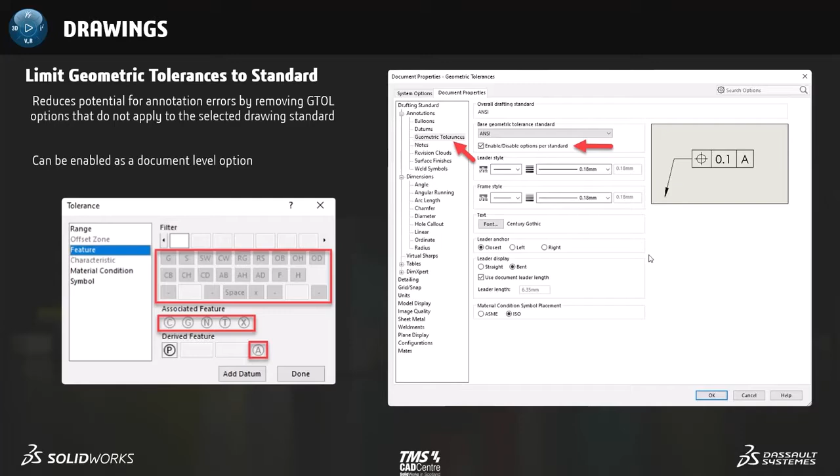If you're using geometric tolerances, you can now limit what kind of options appear based on the standard you've picked. In this case it's got ANSI, but you could have ISO or anything like that. If they don't meet a particular standard, they'll be greyed out. If you haven't used 2022 and stuff, you'll see this updated geometric tolerance interface for creating and adding them. There's now support for new modifiers for different standards, and we can add a max tolerance more intuitively rather than having to manually do that fully.

We could tick this option to apply the max tolerance, just put in our values, so 0.1 in this case. If you're using a hole table, rather than just picking up holes added with the hole wizard, you can now pick up other holes, whether manually drawn circles or other fairly simple shapes like slots, parallelograms, and curves. If you make an absolutely crazy sketch that's not really a hole, it won't pick them up, but these are some of the shapes it will pick up when you tick the non-circular holes and slots option. That covers the drawing side of things.

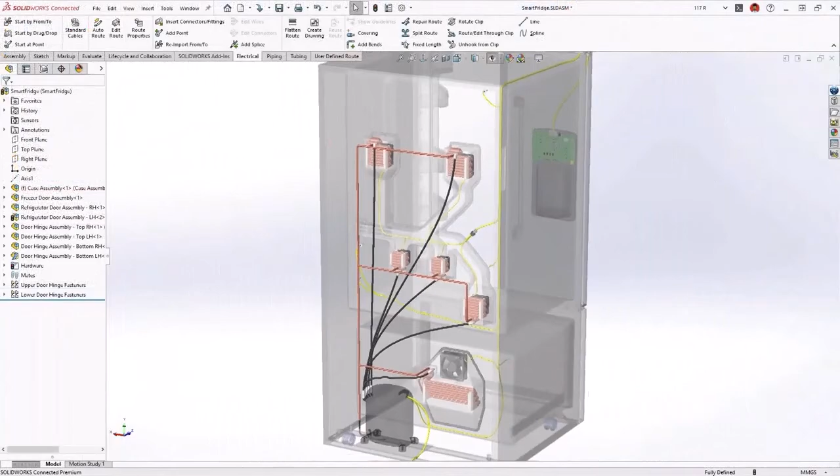Enhancements to SOLIDWORKS routing provide improved automation to design routed systems and properly document them for manufacture. When you connect to the 3DEXPERIENCE platform, your routing libraries are automatically catalogued and securely stored in the cloud, reducing IT overhead of library management while providing accessibility to shared data for all users.

We have some great enhancements, time-saving improvements, and better overall user experience. Selecting a route segment now displays the length and diameter within the property manager. Harness bundle diameter also accounts for unused cores, which improves the accuracy of diameter and mass property calculations. Additionally, you can now display the bundle cross-section for the selected route segment.

For flattened harnesses in drawings, auto balloons for both connectors and wires now appear neatly stacked, even if they are deleted and reinserted. When you hover on a connector table, it cross-highlights the connector symbol, making it easier to identify symbols within the drawing. Adding a column to any table now provides a prompt to update all tables at once, eliminating many redundant steps.

Splices now support multiple connection points, as opposed to requiring a separate splice for each circuit. As well as that, the design library includes a few new multi-circuit splice components.

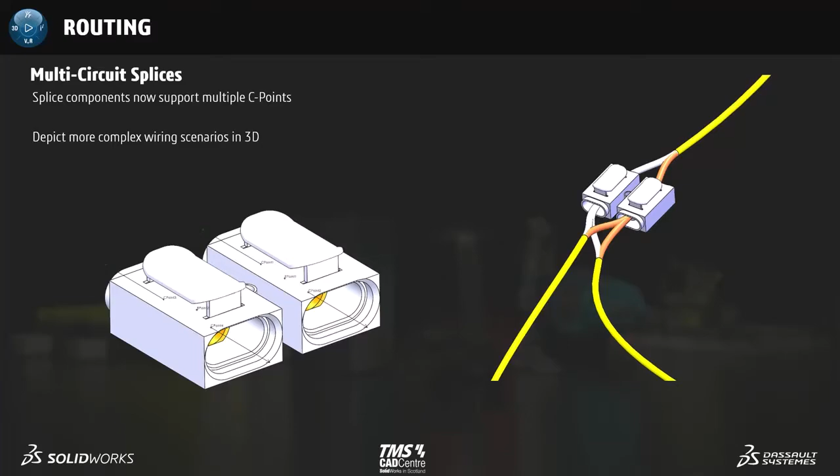The routing library manager sees several enhancements in 2023. For example, the app launches much faster, tab switching and overall responsiveness is improved as well, and the redesigned component wizard interface makes it easier to configure library components. So that's what's new for SOLIDWORKS routing in 2023.

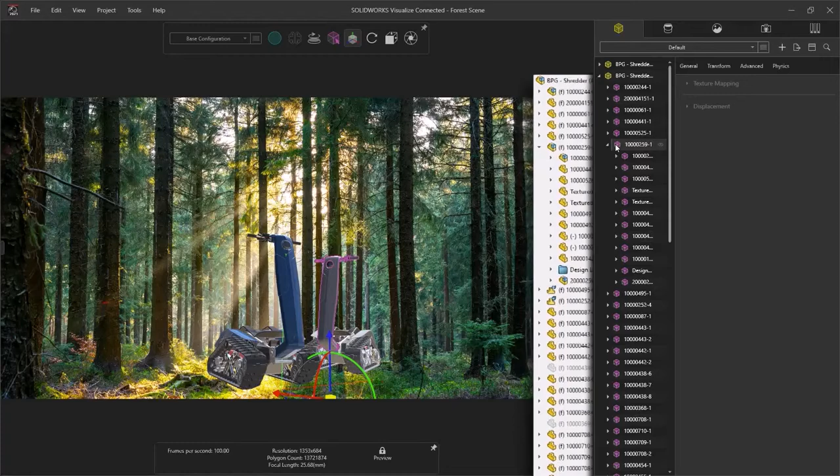The import option now mimics the SOLIDWORKS assembly structure while retaining appearance control in Visualize. This is an ideal situation, as Visualize users can now take advantage of groupings such as sub-assemblies that were already defined in the SOLIDWORKS model. Putting your designs in context can go a long way, and Visualize has always been able to take advantage of nearly any kind of geometry you can get your hands on.

In 2023, we'll see that the standard import options are still available for any non-SOLIDWORKS files, such as this GLTF file. It's common practice to improve performance by making use of preview mode while setting up our scene, especially if it involves complex or high-detail models.

This can result in a lack of feedback on how our setup is interacting with the lighting. In Visualize 2023, the handling of previews has been improved, giving us a much better idea of how light will react with roughness maps and alpha transparency and things like that. We see light from the HDR shining off the wet spots of our trail model here, allowing us to be much more confident in our setup while still seeing the performance benefits of preview mode. Any advanced options such as height maps will be added on top when the rendering resumes.

A common method in rendering is to create a colorway showing a variety of potential color options. Visualize is packed with efficiency tools for this kind of thing. As it always has, the appearance import option groups all same appearances into a single unit.

With a much improved colour picker, this is now the easiest part of the process. With this update, we can bring in colours from nearly any source you can think of. A dedicated tab for colour palettes means that in cases where colours are not available to be imported, they can be added in a similar fashion to previous releases.

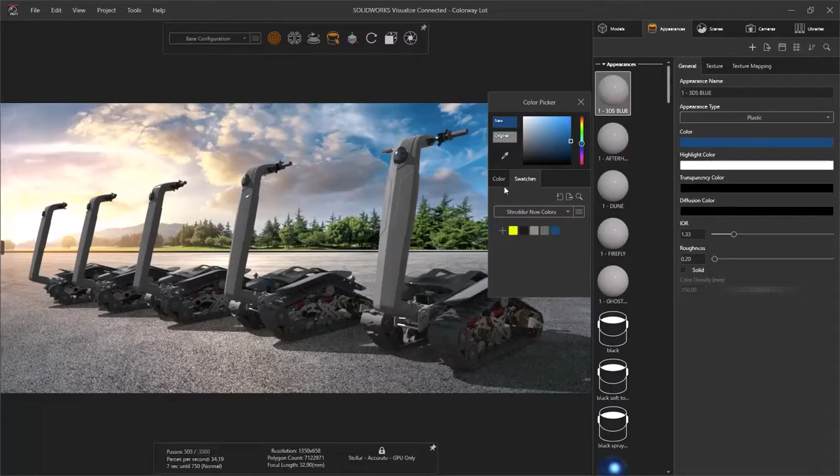Palettes can be exported as shared assets across users, or imported back into SOLIDWORKS so that the correct colours can be applied in the design phase. The last 8 colour selections will also remain in your recent colours across all sessions. This massively enhanced colour management system ensures your exact colour is always right there when you need it.

The colour matched appearances are now ready to be applied, and the appearance import option provides a single drag replacement of all bodywork appearances. With the scene set, it's now time for final renders.

Visualize 2023 offers a new rendering system with the stellar physically correct option. This is a welcome addition as it sets up Visualize for a host of new exciting features and easier integration with the 3DEXPERIENCE products.

Of course, stunning graphics are meant to be shared. Once the renders are complete, they can be immediately uploaded to the 3DEXPERIENCE platform for the rest of the team to enjoy and provide feedback. This release brings a whole bunch of benefits that are guaranteed to reduce the time it takes to produce your sales and marketing content, enhancing the view of many that Visualize is the best tool to use when it comes to bringing CAD models to life.

So there we saw how import into Visualize has been enhanced so we can mimic the SOLIDWORKS tree. The preview quality has been improved to give a more accurate representation of the final render, and we'll be able to link it to all the 3DEXPERIENCE platform products in the future as well. We also saw a host of improvements to the colour picker, which will make that process a great deal easier and keep everyone working off of the same colours across the board.

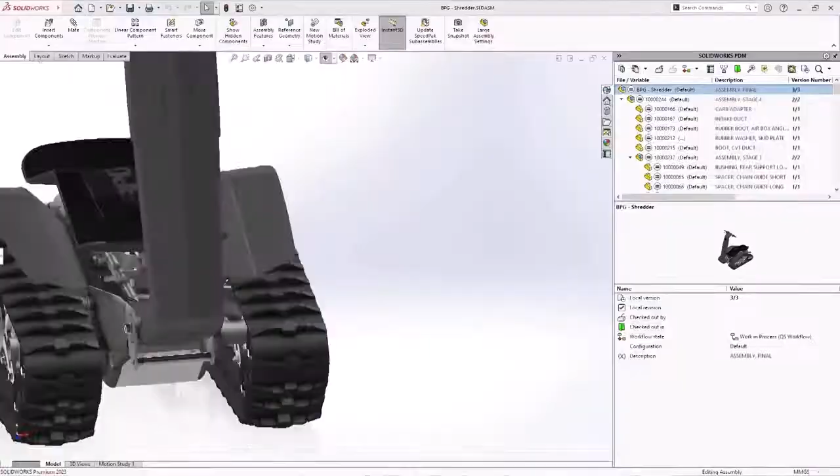So SOLIDWORKS PDM Professional has long set the standard for an on-premise data management solution. And with the 2023 release, it's once again raised the bar for usability, performance and security. Access to complete and accurate data is critical to getting any design work done when released.

For 2023, static text on the data card can now be copy and pasted into any field, reducing potential typos and errors. Property field data now supports custom tooltips, so it can make it easier to find and fill in the appropriate information when we just hover over them, and we can edit that on the admin side of things.

Administrators can also include user information such as variables for both transitions and revision comments, providing improved design history. And for greater clarity, the Get Now dialog is now included when you're looking at the history, so you can see when people have done the Get command.

Automated workflow notifications, when you move things through the workflow, have long been predetermined - you couldn't really customize them. But now in 2023, in PDM Professional, you have access to the full HTML notification editor, allowing you to customize the content that's displayed in any of those notifications. You can also include images and stuff like that as well, and obviously you can link that into your email notifications too if that's something you've got set up.

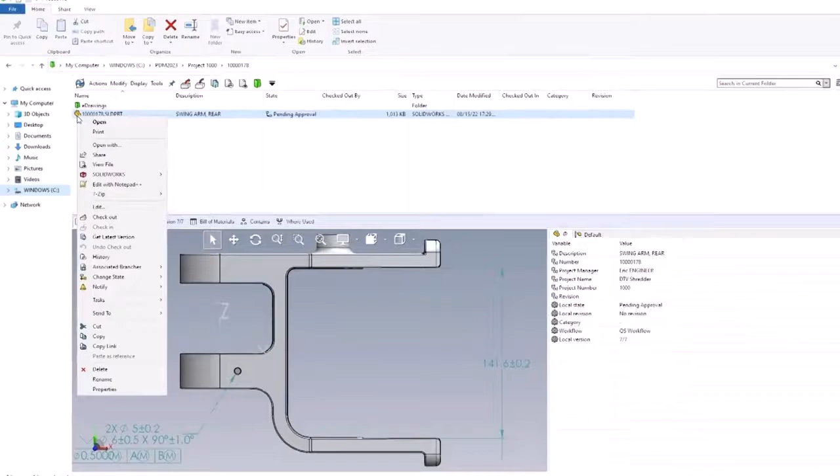Creating and consuming design deliverables is crucial for working with others, and customers licensed with SOLIDWORKS MBD can now use a convert task in PDM to create STEP 242 files, further enabling some of the MBD capabilities linked in with PDM. For eDrawings users, Windows Explorer now supports previews and allows you to easily visualize other file types as well.

You can also now use the admin tool to have it automatically log you in with a predetermined login, usually more for your PDM admin users specifically. And if you do have any tasks set up inside the PDM vault, whether that's PDM Standard or Professional, you can add the task host configuration in steps.

When we're looking at controlling the users, you can refuse the login of multiple users at the same time, rather than previously editing them one by one, or controlling an entire group inside there. When permissions are set on a group by group basis, we can now click the little group icon and find out which group has those permissions given from inside there.

Finally, performance and security have been significantly enhanced in PDM 2023. Common archive server activities like adding files, getting files, and transitioning files will now see significant performance improvements, particularly with high latency environments.

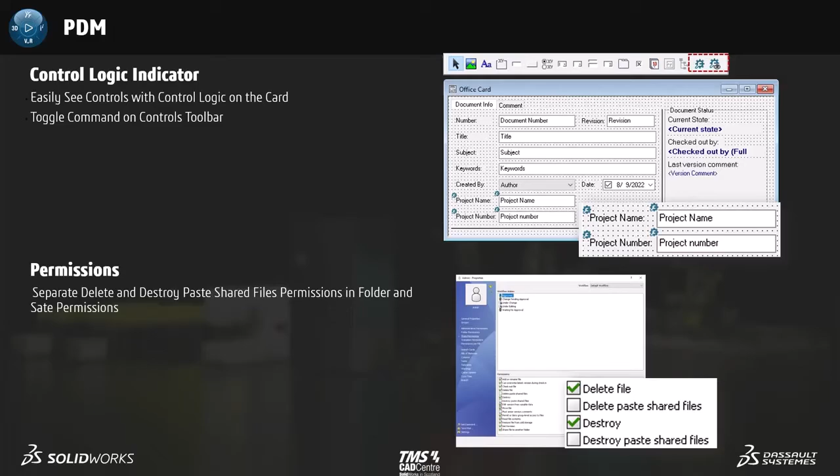In the data card, you could also add what's referred to as control logic. Previously, if you were looking at the data card, there was pretty much no way of knowing if you had control logic added - you'd need to click into tools and open the control logic window to see if anything was there. Now you'll get a little icon appear; in this case we've got control logic for the project name and project number, which is what that icon represents.

We've also had some permissions split out to give us more control, particularly when sharing files and folders - this is under the state permissions.

For those of us with PDM Professional, if you've set up Web2 to access it on your phone or tablet when you're out and about, there have been some localization improvements for other languages as well.

Coming with SP1, so probably around 2 or 3 months from now, there'll be some enhancements to Active Directory even further, where you can choose to manually sync things or potentially set up automation so it actively syncs at particular times. You can choose what it syncs, whether it's adding users, removing users, updating information, and stuff like that. So that's going to be with SP1.

Another enhancement with SP1 is regarding the private state. So any new folder permissions that are enabled, you'll be able to control and change them a little bit further - there are more permissions in there. So that was some of the enhancements to PDM.

Now, the next section would normally be Manage, based on who has attended in person and who's registered online. As far as I'm aware, I don't believe anyone's using Manage, so I'll skip over that section for time's sake. If I'm wrong, or you want to know what's new, or you've never even heard of Manage, do get in touch with us afterwards and we can explain what that is or show you what's changed and new in it.

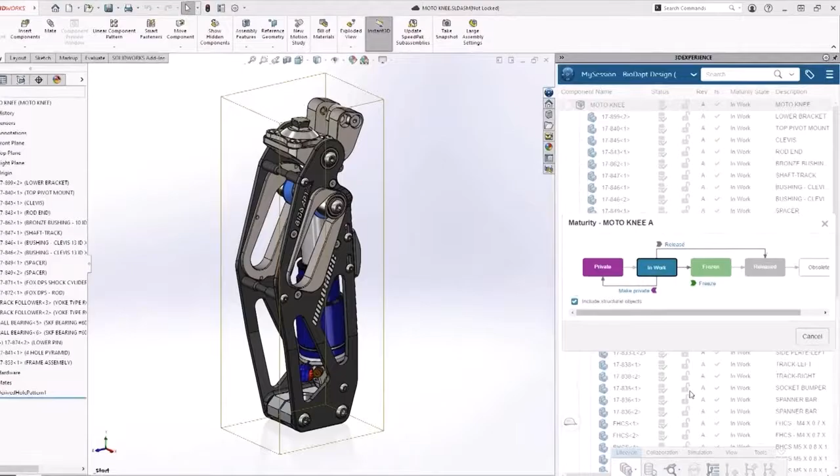With the 3DEXPERIENCE platform, there's minimum configuration, so within minutes Eric's able to begin securely saving his data to the cloud directly from inside SolidWorks. We can optionally use bookmarks to provide a familiar way to organise our structure and data, potentially mimicking our Windows Explorer folders if we want. With built-in lifecycle management, you can control the design's access privileges simply by updating the status of a file, similar to a workflow in PDM, without purchasing a single server.

So now Eric's team have access to designs anywhere in the world in any browser. Changing over to a different user, in this case Pete - he's in product management and maybe not a SolidWorks user. When he's on site with a supplier to review the product structure, he has direct access to Eric's design that's just been uploaded, and with the help of tags, he can quickly filter and visualise the parts that have been made and those that are going to be purchased. So we could filter for those.

When Pete's supplier provides some feedback, you can make markups, highlight them, and add some notes, so our engineers then know what changes have been made. We could potentially use collaborative tasks and assign that task to Eric, the engineer, giving him that task to set off - setting the priority severity, deadlines, adding referenced images or notes, and linking to the actual files themselves.

Back in the office, Eric is able to access Pete's task right from inside SolidWorks, get a notification for that, and he can update the status and then open up that assembly simply by dragging and dropping it into SolidWorks. The assembly is then brought local to his machine, ensuring optimal performance. Opening up the markup, he can see any of the notes that have been made, and then know which files to create a new revision of and start making those changes.

We can add in a revision comment, and we can see that the revisions went from revision A to B. That's just because we've got an alpha revision scheme in this case, but it could be numerical or something different if we wanted to.

With the help of the integrated search, we can find just the right piece of hardware to potentially finish this task, and with the changes made, it can update the release status of the design, and we can finalise that task and pretty much tell our boss that the task is done.

So with the collaborative designer for SOLIDWORKS, managing and collaborating on your SOLIDWORKS data has never been more accessible, and as your needs grow, the 3DEXPERIENCE platform will work and continue to overcome barriers with connected change management, product management, release management. So what barriers to design collaboration will this help you overcome next?

So that's just a little bit about the kind of cloud collaboration inside there. Now, obviously that was a little bit about the two different data management systems that are kind of on offer.

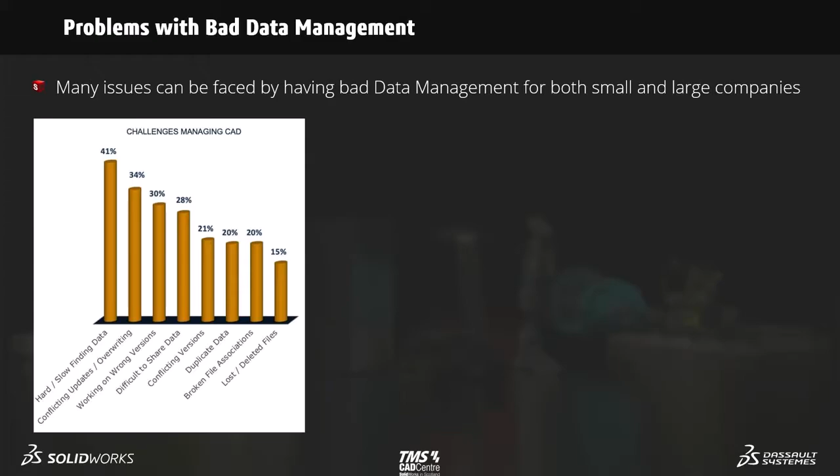So obviously the problems with bad data management, apart from recreating it, we've got 2 images that show the challenges of CAD inside here. This was a little survey that was done, showing some of the challenges that can be faced with CAD. Obviously a lot of people agree it can be hard or slow to find the particular data you've got, conflicting and overwriting information and so on.

Now, obviously we've got a few different options for data management. The simplest option is you have literally no data management, which is probably what you might do with your own personal files at home. We've then got an option of manual data management - we can use a server, a network drive potentially, which is quite common with a lot of our customers still. You might think of maybe using Google Drive, Dropbox, OneDrive, something of that nature. Then obviously we've got SOLIDWORKS PDM, and then we've obviously got the 3DEXPERIENCE platform.

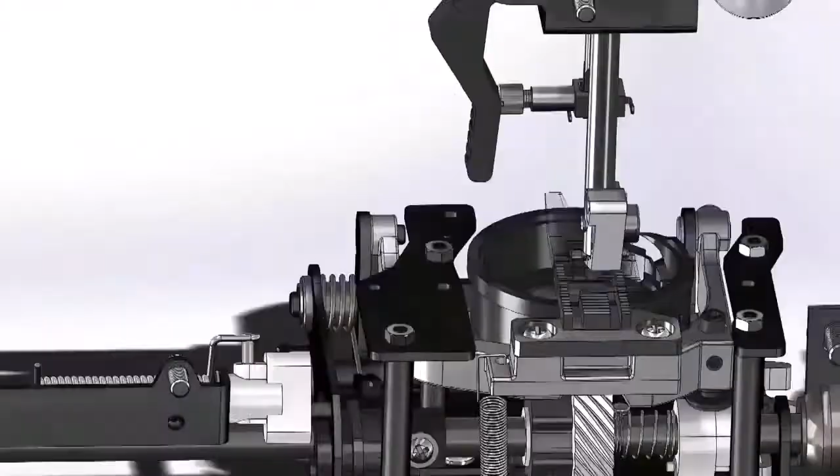We've got this sewing machine model, which has dozens of moving parts that all need to work perfectly together to get good results and ensure reliability. Looking at the new enhancements in SolidWorks Simulation 2023, we get insight into these complex mechanical systems. Zooming in on the presser foot assembly, this handle uses a cam and follower design to raise the foot away from the fabric. The follower is held in place by a strong spring that holds the fabric down while sewing. We want to make sure the spring is strong enough to keep enough pressure on the fabric, but not so strong that it's difficult to raise the lever. So we need to test multiple spring stiffnesses until we get it right.

Since there's a sliding contact here, we could see long solve times when running the analysis. But in Simulation 2023, there's a new adjustment for contact penalty stiffness - there we go. By moving this slider all the way to the left-hand side, we can trade out some of the contact pressure accuracy for faster solve time. This is great for testing complicated assemblies or running multiple iterations when searching for an optimized design.

In this head-to-head comparison, where the contact penalty stiffness is set to its lowest value on the right, on the right-hand side we can see that the simulation runs significantly faster, almost twice as quick.

Now with the needle bar assembly, we want to ensure the needle clamp is strong enough to take on the repetitive forces from the needle. To simplify this assembly, we'll remove these set screws from the analysis.

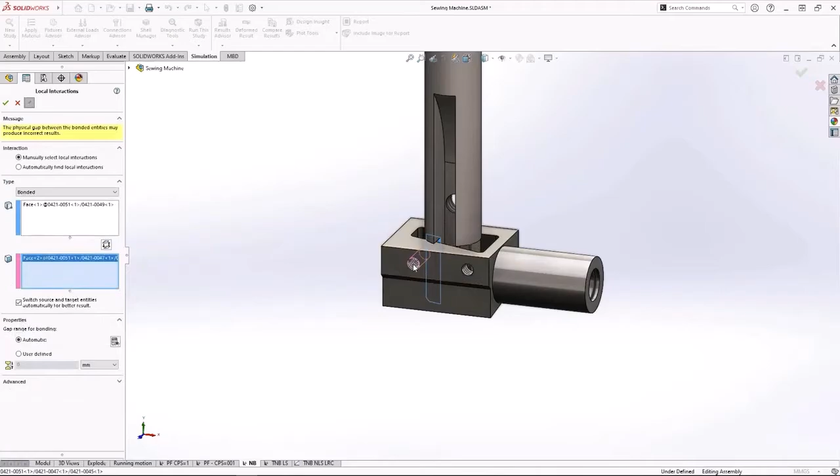New in Simulation 2023, we have more flexibility when creating bonded contacts between non-touching faces at extreme angles to each other, like the threaded holes for these set screws and the flat cutout on the needle bar.

The upper shaft assembly has several plastic injection moulded parts with complex geometry, which could require some advanced meshing and mesh interrogation. New in the Command Manager is the Diagnostic Tools flyout menu, which provides quick access to important tools like mesh quality diagnostics. We can quickly detect some poor quality elements that will require mesh refinement to ensure accurate results here.

For SOLIDWORKS Simulation Professional users, the Under Constrained Bodies command has been greatly improved. The solver now performs a singular value decomposition, which is much faster than previous versions. You'll also see far more realistic feedback of complex under-constrained systems, like we have here with this animation of the thread take-up mechanism.

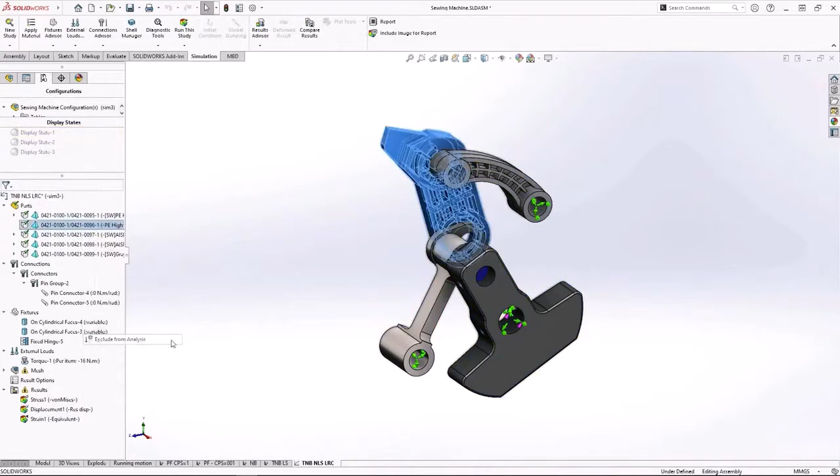And for Sim Premium users, we saw last time that we had the linkage rod connector introduced as an enhancement, but that's now been made available for non-linear static and dynamic studies as well. It'll work perfectly here to help simplify the analysis and speed up run times. Changing the end conditions, offsetting the link, and dimensioning the rod will replicate its exact function in the analysis.

So SOLIDWORKS 2023 will speed up the analysis process with new enhancements for every designer. Contact problems will run faster than ever. Bonded contacts between non-touching faces are more flexible to use. The enhancements to Simulation Professional and Premium allow for quick investigation of boundary conditions and powerful simplification tools to help get your job done fast.

So we just have a quick summary of some of those points. We saw the penalty stiffness control for contacts, which will allow us to set the slider to a lower value and speed up the solution time. There's been some improvements to the bonding interactions for non-touching faces that aren't facing each other and have no projection area between them.

We now have the diagnostic flyout menu in the Command Manager, making that area a little bit easier to access things like our mesh quality diagnostics. Pro and Premium users will see some enhancements to the Under Constrained Bodies tool, which will really speed that up and give us some nice visualization of the bodies. And Premium users can take advantage of the linkage rod connector in their non-linear static and dynamic studies as well.

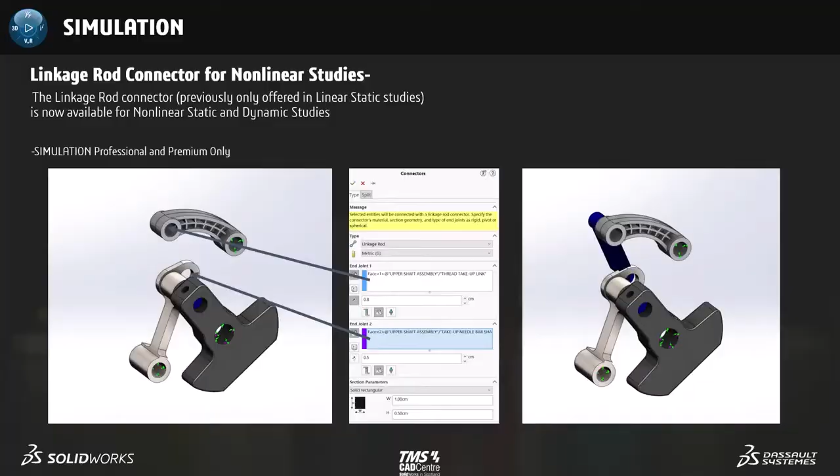So that was SOLIDWORKS simulation. From there we'll move on to some advanced simulation where we'll take a look at what we can do on the 3DEXPERIENCE platform as well. And again, we'll just get some of these points there. I'll just prepare myself for another rerun here.

So connecting SOLIDWORKS to advanced simulations just got a lot easier. Sorry, shouldn't have had sound up. I'll be back. Thanks.

To automate this task, a custom SOLIDWORKS material library can be imported into 3DEXPERIENCE. This eliminates the need for him to run through that time-consuming and error-prone task of creating the materials again, so it's made nice and easy for him. As you can see there, it's just getting imported back in.

So in these new material objects, the SOLIDWORKS simulation material properties are maintained and converted to Abaqus multi-physics properties, and these are leveraged to solve for additional real-world phenomena. For the case of the inevitable needle break, he only needs to add damage properties in order to get his results.

Make sure I'm at the right point here. Yeah, sorry guys, I've thrown myself off again at the start there. Yeah, so I know where I should be. Sorry. Just try to find the right one. Sorry. Just need to find the right one. Yeah, sorry guys, I'm good now though. We can carry on here. But sorry, I'm just getting a wee bit thrown off with some of the bits of the video here.

In this study, Adam's got goals of minimising mass and stress, and the best design alternative can be identified for him in 3DEXPERIENCE. With a couple of clicks, he generates the alternative design, so he can perform additional analyses and update the SOLIDWORKS assembly with the optimal part model.

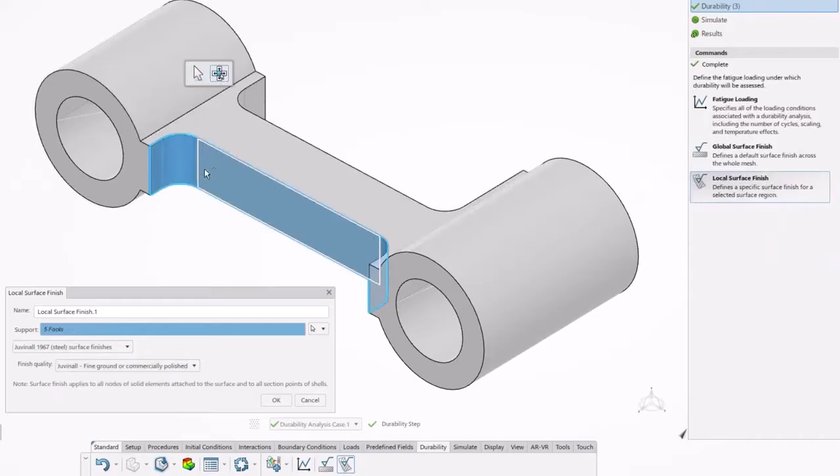To evaluate how long the link will last, Adam creates a durability analysis case and defines the fatigue loading. The results identify where and when the link will fail first, but you can increase the life without changing the geometry. He modifies the surface finish in the weak parts only, which minimises the amount of manufacturing needed to create a long-lasting part. All of Adam's work is managed and automatically backed up on 3DEXPERIENCE.

He also doesn't need to spend time creating reports of his simulations, since all the data is on the platform. The details can be easily viewed in 3D in a web browser. Comments, notes and changes can be shared with other users in the same cloud-based environment, streamlining the communication process between the team.

And this product development and validation doesn't stop at structural analysis. You can work with fluids, plastics, electromagnetics and motion studies as well.

So there we saw some of the powerful simulation capabilities provided by Simulia on the 3DEXPERIENCE platform, where we can easily import any work we've done in SOLIDWORKS and make use of things like Abaqus's multi-physics properties, explicit dynamics technology and durability studies, all the while freeing up our resources by running it in the cloud.

The simulation solutions provided by Simulia cover structures, fluids, plastics, electromagnetics and kinematics. This is brought to you by the SOLIDWORKS sister brand Simulia, known for its proven accuracy and scalability with Abaqus and fe-safe. This includes robust general contact, simplifying your simulation setup process, advanced material models, multi-physics and automated and advanced meshing technologies.

And now just to cap off the simulation section, we'll take a quick look at FlowSim. Sorry about that again guys, I'm getting a wee bit muddled up with certain bits of my video there, but thankfully this flow simulation section doesn't actually have a video, so I won't see that again.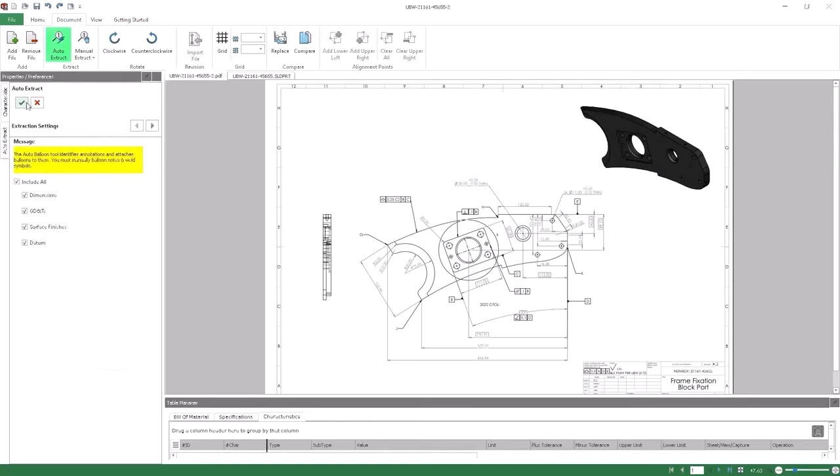Current and new standalone users alike will be thrilled to discover that the all-new auto balloon capability now extends to file formats such as PDF files. The previously extracted Smart Extract tool has been replaced with the new Auto Extract command, a one-stop shop for all of your auto ballooning needs, for both 2D and 3D files. This provides an enormous jumpstart to the process and will save huge amounts of time setting up your inspection reports for those PDF files.

Inspection brings added intelligence to cases where manual ballooning is used as well. The manual extract now identifies other characteristics as well. When working with the SolidWorks Inspection add-in instead, inspection setup can now be fine-tuned with a set of criteria.

Sequences can now be created and named for future use. These sequences set up custom starting points and can be applied for a variety of purposes. Auto extract can now be limited by sheet, as an added level of control. By default, all sheets will be selected, but you can untick a particular sheet if you're wanting to.

You can also take advantage of the power of automated ballooning in more situations than ever before, with added control over these sheets and sequences. Cleanup and reorganization has been enhanced as well.

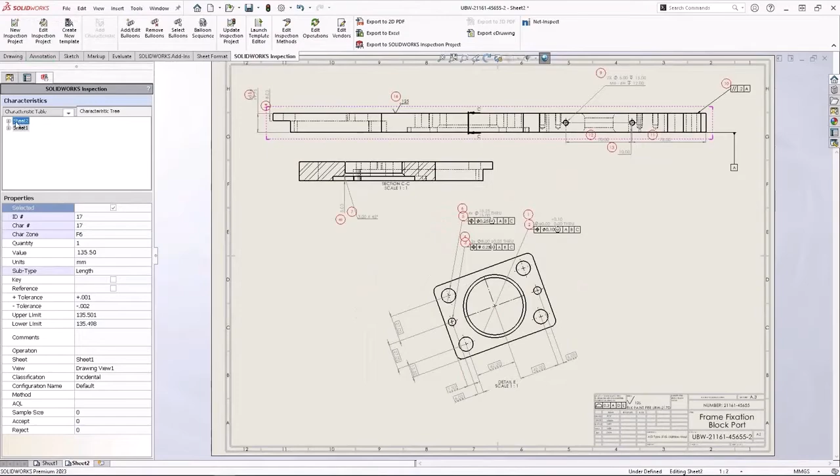The characteristic tree at the top left now provides a pane where balloon numbering can be viewed and modified on a sheet-by-sheet basis, or as a single drawing view. Reordering all balloons at once is now easy, just a drag and drop to reorder as required. Likewise, reordering drawing views results in the same effect of things being updated. In the characteristic table, balloons can be reordered by view or manually dragged.

Along with the ability to fine-tune these balloons on a sheet-by-sheet basis, we can also export multiple sheets or just a single sheet if we want. In this case, we're just going to tick both of them, so we could as well tick all. And we can also export these to Excel documents as well.

SolidWorks Inspection is more consistent, more intelligent, and more efficient than ever before. So you can take advantage of some of these enhancements with the new power, retain the control over your model, and get your inspection documents done faster with Inspection 2023.

So that's just some enhancements to both the standalone application, which we looked at first, as well as the add-in inside SolidWorks, trying to make all the kind of extraction of the information in the balloons a little bit more automated, so you don't have to go through and manually add them and create them one by one. But if you did manually change things, like reordering, that's obviously going to be quicker, and we can do things more on a sheet-by-sheet basis rather than previously affecting all the sheets at the same time.

You'll be stuck with me for one last section on Composer. Quite a short section, not too many people using Composer. But what we can look at for the Composer side of things is we can look to create what's referred to as view collections.

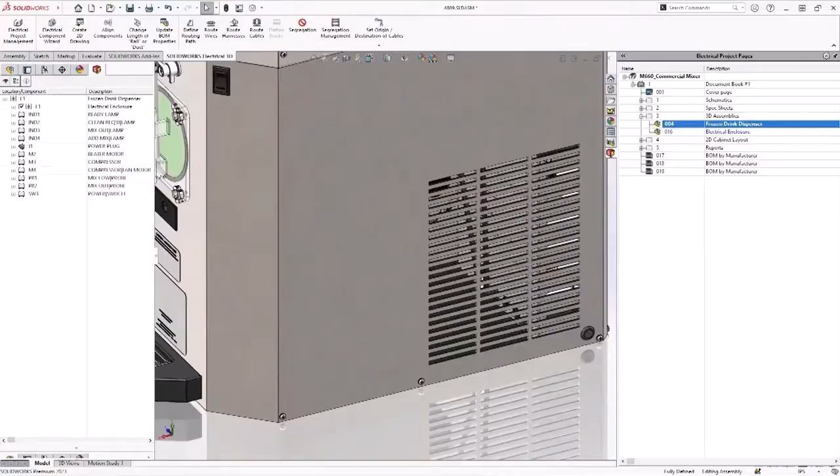SolidWorks Electrical 2023 introduces new features so you can more accurately design and document your wiring, cabling and harnessing projects. In this frozen beverage machine, we need to complete the power and switch circuit for a new mixing motor. Then route everything and generate final PDF reports.

A single component, like this motor here, can exist in multiple single line and multi-line schematics, as well as in 3D models. In 2023, deleting components is enabled, giving you a report of the impact and the option to remove the component from all drawings and 3D associations in one click. Let's make some room for a new motor.

Valuable information is stored in this manufacturer part, which can also be valuable in 3D. In 2023, all component properties will propagate to the associated 3D model. Properties like power and speed will definitely be useful on the mechanical drawing. And custom property compatibility now extends to weight, which will override the mass properties in 3D. This gives you more accurate ability to measure weight and balance.

You can also create on-the-fly dynamic connection labels, which are based on configurations and provide just the information and number of rows needed.

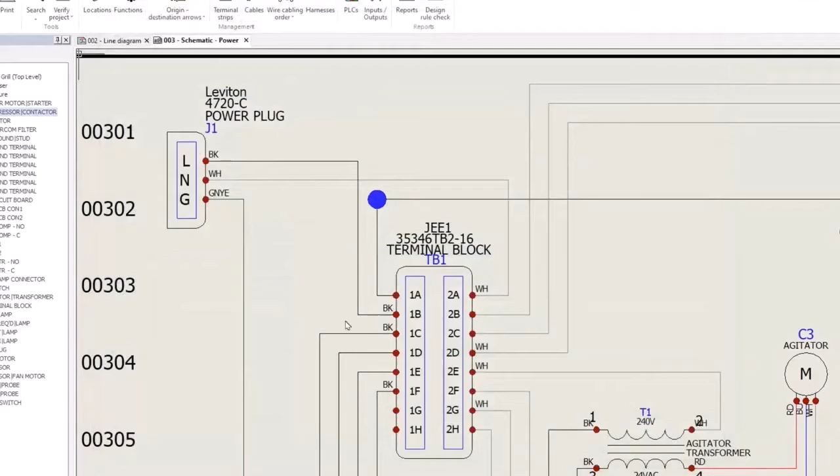Since some customers hardwired a frozen drink machine, we stopped including the power plug, instead providing a length of pigtail. In 2023, you can define open-ended wires for routes, capturing situations like these where the bare wire is still important to document. The project deliverables include a wire list with lengths. This is where electrical 3D is invaluable.

In 2023, new quick filter buttons let you fly through the electrical manager tree. One click to expand and see all components, another to hide or show what's already associated in this assembly or others. With new component icons, you can instantly differentiate the electrical association and 3D model states. For example, if it's associated to a part or assembly, if it's associated in another assembly, if it's hidden or suppressed, etc.

In 2023, you can now associate multiple components in one command. The new associate interface is redesigned for enhanced usability, which means much fewer clicks to define your components in 3D and start routing. In many jobs, the project reports become the final deliverable.

Tables like wire list and manufacturer bills of materials can easily be generated, and now in 2023 they can be copy and pasted and stay associative. In this case, a bill of materials can be added to this one sheet drawing, and manual updating is a task of the past.

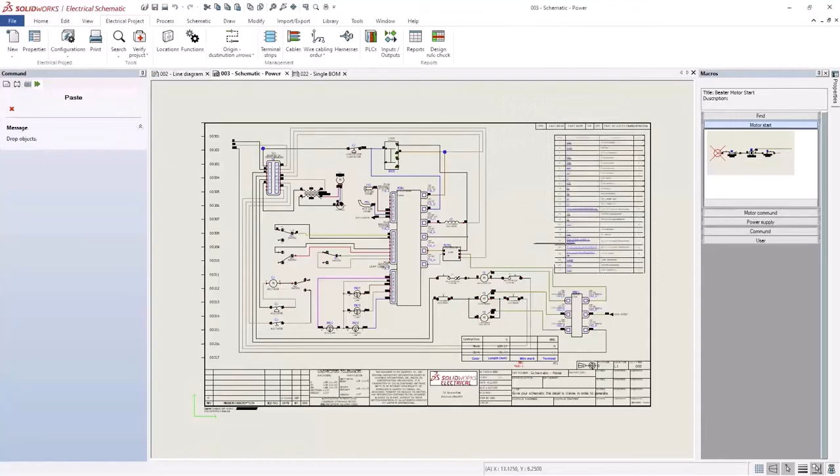Electrical 2023 includes support for inserting a wide variety of newer image formats. For example, PNG, JPEG, and TIFF are now supported. This eliminates the need to first convert an image to bitmap.

With the project complete, many times you want to print everything to a PDF file. Frequently, reports are a mixture of landscape and portrait sheet orientations like this one. The new automatic orientation option is a time saver when you want your PDF to be generated as you intended.

SolidWorks Electrical 2023 brings you expanded capabilities to manage components and share information between 2D and 3D, along with more flexibility in documenting your schematics.

So a lot of great enhancements and new features you've just seen there, which will be available in 2023. For example, we have dynamic connection labels, so you can now enable labels for electrical connectors that dynamically adjust for the number of circuits or pins in a connector.

We can embed a report to any of the electrical drawing types. These include schematics, single line diagrams, and 2D control panel drawings. This provides more complete documentation and eliminates various extra steps.

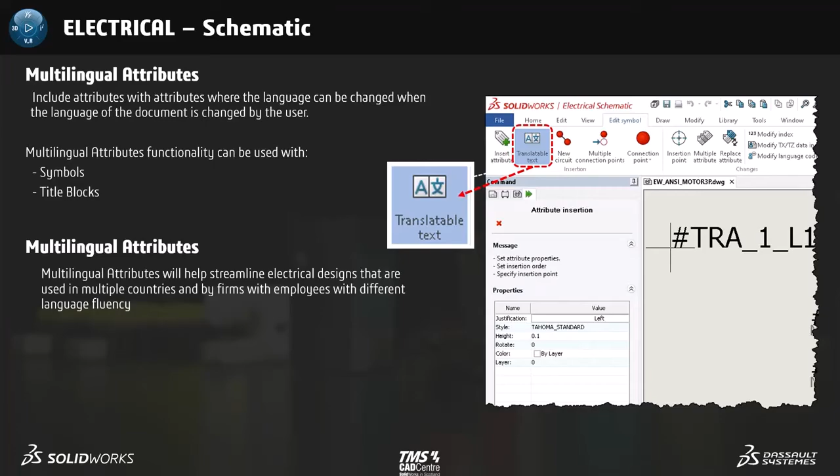In Electrical 3D, we can bring a full list of properties from schematic over to 3D, including manufacturer's part information and custom properties. The weight defined also overrides the mass properties of the associated 3D part.

We have enhancements to the associate feature, such as making multiple selections in one command, displaying connection point information on the screen when you're making a selection, as well as the ability to overwrite prior selections to make bulk updates.

In the electrical manager tree, there have been new icons added to represent the different states of a component within the electrical project. For example, these icons represent if it's associated to a 3D part or an assembly, etc.

There are also enhancements to using Excel automation for schematic design operations. For example, you can set more wire properties, including wire section, insert and connect origin arrows in a circuit macro, and you can also replace a symbol while inserting a macro.

So that's what's new for SOLIDWORKS Electrical 2023. I will now pass you over to Scott.

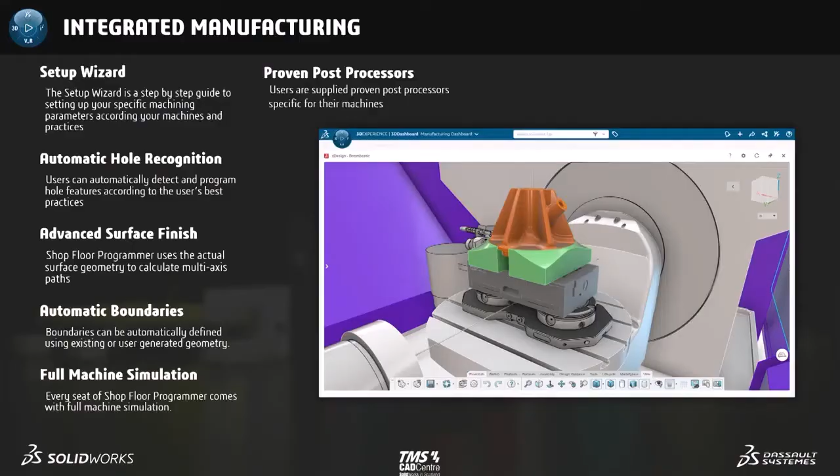Parts are becoming more and more complex and delivery times are getting shorter. When you add the advancements of machine tools, it becomes crucial that the manufacturing process is streamlined. Being able to program parts faster and more accurately allows companies to focus on new jobs and not on manufacturing errors that cost delays.

So here we have Sam, or me with my glasses on as it turns out, and he's using Delmia's Shop Floor Programmer, which makes life a whole lot easier for him. Let's look at some of the tools he uses to accelerate programming time and reduce manufacturing errors.

Sam starts with the setup wizard, which is Shop Floor's machining wizard. It simplifies the tasks of setting up your working environment with a guided step-by-step workflow. The wizard speeds up setup time by defining machines, post-processors, stock and tooling for any machine in your shop.

Defining machine operations is fast, easy and accurate in Shop Floor Programmer, utilizing automation tools like automatic hole feature recognition. Feature recognition will identify the diameter and depth of each hole on the part and assign the appropriate process.

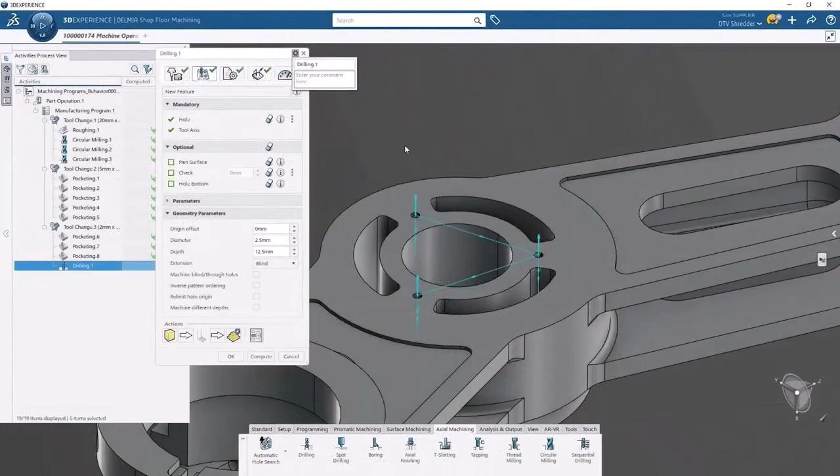Setting machining areas and boundaries can be a time-consuming task in most CAM systems. Automatic boundaries and process-specific controls help you fine-tune your programs for your specific machines without fear of gouging.

Accuracy is obviously extremely important here. So for the final surface machining, Sam takes advantage of advanced surface machining to precisely machine the entire surface of the part. Shop Floor Programmer uses the actual surface geometry to calculate the multi-axis paths, and this eliminates surface faceting and any costly handwork that may follow.

Advanced surface finishing can also be used for complex 3D geometry, such as the webbing on the bottom of the part. You can also define the boundaries of all operations, like this time-intensive machining process, by using limiting contours. The selection tool makes it easy to define this area, using both existing geometry as well as automatically defined geometry.

Now Sam can review the entire machining process at any time by running a full machine simulation. Here you can look for any potential problems and clearly see the different types of operations separated by specific colours.

Toolpath simulation also shows leftover stock or remaining stock, which makes cleanup fast and easy. The graphic representation of the toolpath laid over the part gives you a clear view of each operation and each movement of the tool.

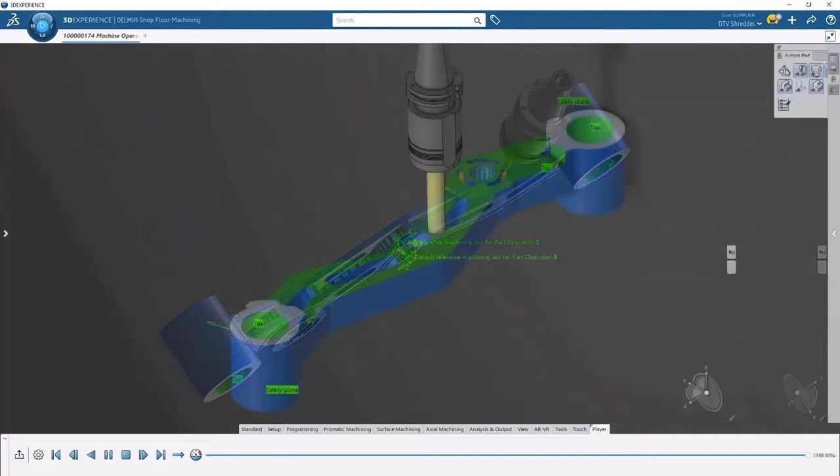Once Sam's happy with his results and he's been able to watch all these simulations and make sure everything's going the way that he wants, he can just save out the NC code and send it off to his machine. And he knows the code's right because Shop Floor Programmer supplied him with post-processors specific to the machines in his shop.

Once the job is running, Sam has constant visibility through the 3DEXPERIENCE platform. He also knows that having all his data in one place helps his team communicate any changes as they come up. Delmia Shop Floor Programmer gives users the ability to program any machine in their shop quickly, easily and accurately, cutting timeframes and resulting in more accurate parts and faster time to market.

So again, we just have a quick summary of some of those points in the integrated manufacturing section, such as the automatic hole recognition and boundaries, the advanced surface finish, and of course the full machine simulation.

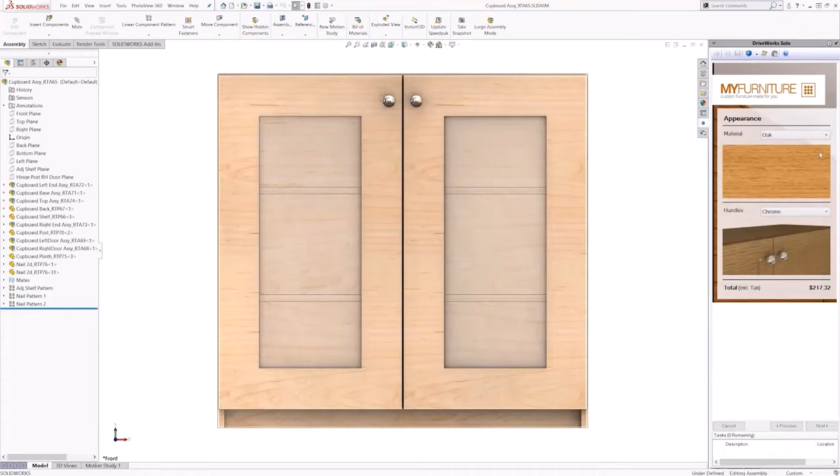And pretty much what I'm going to be doing is hitting finish. You'll see it kind of flash between different windows, and pretty much what it's doing is taking your one part, one assembly, and one drawing that you've created, and changing all the appropriate views based on the options you've chosen.

And using the control logic you've set up, it'll work out how many shelves there should be, if there's enough room, that sort of idea - similar to what you could do in SOLIDWORKS manually, but obviously trying to automate that. And you can obviously link that into saving your files to PDM, all of that sort of idea.

And then it'll save them, and I could literally go straight back in. Maybe I've answered another phone call to a customer that's phoned in. They've given me some new sizes, maybe told me they want a different type of wood, for example. And obviously if you're using the costing side of things, it can even give you the final costs of all that inside there.

Obviously DriveWorks Express, you've already got that kind of free. There are trials and stuff available with DriveWorks Solo if that's something you're interested in, but it's just something that people usually a lot of the time will create similar stuff and they'll just create new configurations. Maybe they'll do save as, but that could be an option that's available.